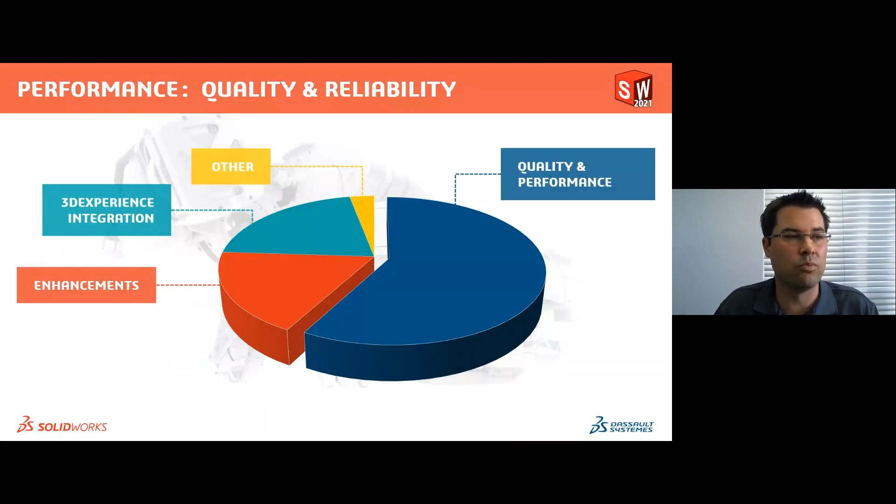And then a further chunk of the pie is enhancements, and then the integration into the cloud with the 3D Experience platform, and then other applications. But you can see SolidWorks has spent a huge amount of time working on making your SolidWorks work better with workflows, bug fixes, and be a lot faster.

So this is looking at the quality and the reliability of SolidWorks over the last 5 years. And the next slide I'm going to show you is going to talk about the severity of these SPRs, these software performance reports, these bug fixes or workflow fixes - things that maybe aren't working right, or software functionality that's not working correctly, or something that just isn't always reliable.

SolidWorks has had a huge increase in closure rates - a 25% increase in the closure rate. Closure rate of what? This is a really good slide to explain what SolidWorks has done with regards to balancing out these bugs or functionality problems into critical versus impact.

The little red circle in the middle is what SolidWorks has been focusing on heavily over the last few years. The problem is that severity 3 and 4, which are on the fringes, are things that are working but just maybe not always reliable, or maybe cause instability. Those things have been growing and growing over the last 5 years, while SolidWorks continues to work on severity 1 and 2.

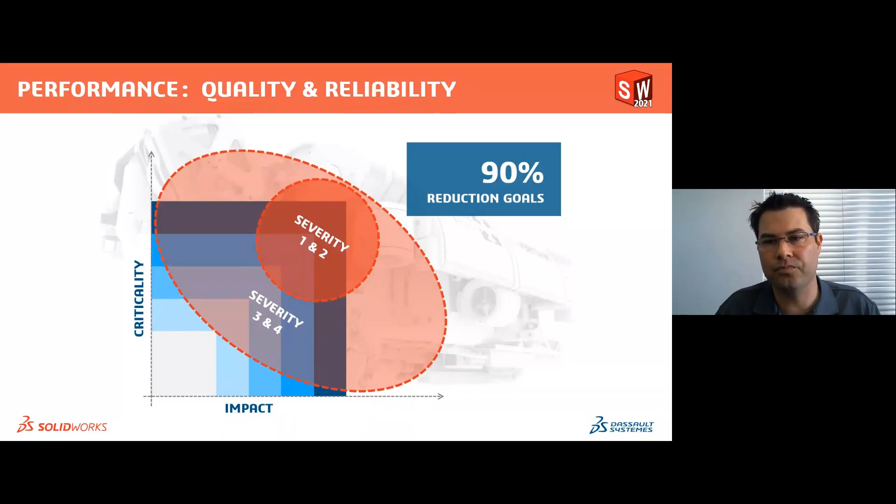SolidWorks has done an incredible amount of work over the last year to reduce this, and they've actually gone more than a 60% reduction of their backlog, hitting severity 1, 2, 3, and 4. They've massively added to the reliability, quality, and performance of SolidWorks by focusing on these 2 key areas. Over the next few years, they aim to reduce all of these bugs right down to 10% of what they're working on. It's a huge commitment from the SolidWorks development team to really make this the most powerful, most stable, most performing software in the world, on top of what it is already right now.

And this is really exciting and really great to see that SolidWorks is listening and they are making this better and faster.

In fact, before I move on - and this is a PDF I can share with you a bit later - there's a 31-page PDF listing all of the SPRs that were fixed in this version of SolidWorks. This is, I think, the 17th or 18th launch I've done personally, and it's the only one I've seen where they actually list the number of service packs or SPRs, bug fixes they've done in the last year in a what's new document. So if you go to your SolidWorks and go to Help, About SolidWorks, they actually list the sheer volume of fixes they've done, which is great.

So let's move straight on to SolidWorks in action.

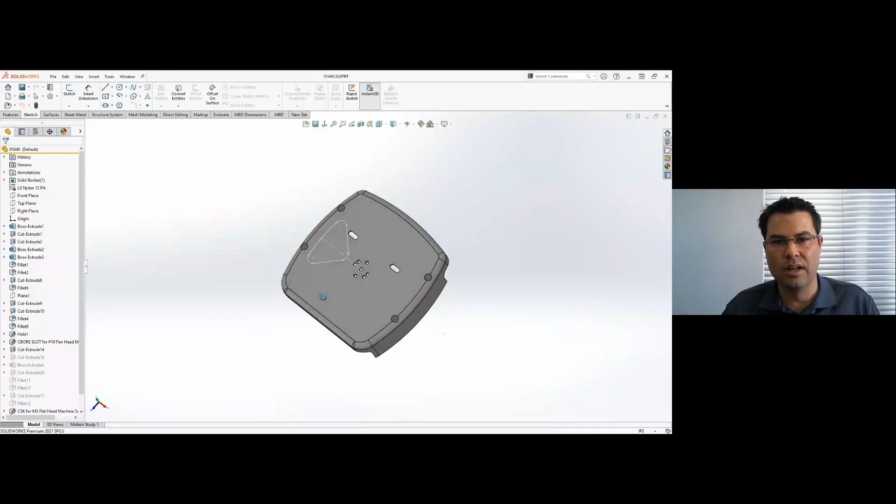Okay, first things first, let's go look at the SOLIDWORKS interface. These are all small things for you users of SOLIDWORKS who've been using it for a while, things that could work a bit easier or give you an easier way to adjust or change things. One thing that annoys me is these gray sketches - it's always difficult to see how they fit in with a model, especially with different color backgrounds. So what you can do is go to settings - SOLIDWORKS has redesigned the look of the color options.

You'll notice the color settings have changed, and your highlighting schemes too - I'll get to selected items now, but let's go to the sketch first. If you go down to sketch and look at an inactive sketch, you'll notice that gray color. If I double click on that palette and make it a funky Lumo green color, and go back to my model - inactive sketch, there we go - now I can see that a lot easier.

What's really interesting is that when you select seeds in a pattern, it's always difficult to understand where's the seed when doing a linear pattern - which is which, and you don't know which one to edit. If you look at these selected items, you don't know what it is. So if you choose maybe blue highlighting as a scheme, selected item number 1 is going to be the root or seed, and the rest will be the pattern or children of that pattern. You can actually change even those colors. SOLIDWORKS really brightens up in 2021, and you can manipulate those as you want, making it a lot more pleasant to work in the environment.

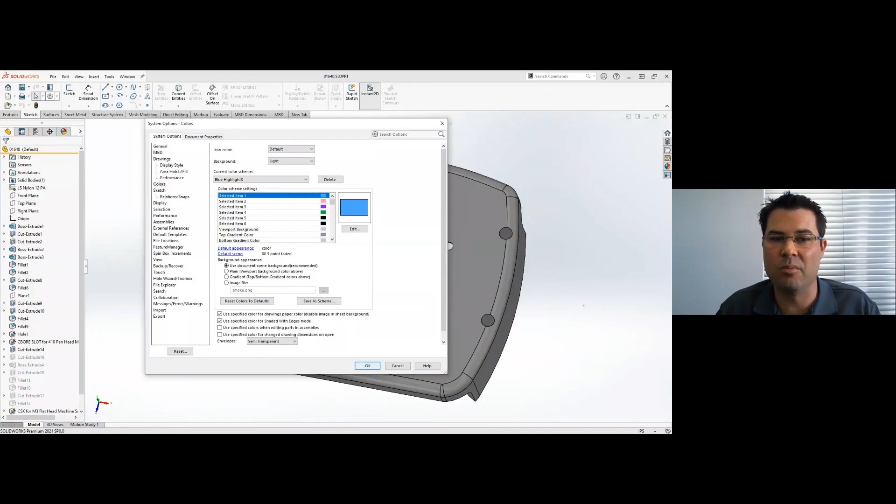And I'll show you some of these examples as I work now.

Robert Miller from iBow is going to be talking tomorrow - he just bragged about this massive screen he's got, this huge 4K, 46-inch screen on his desk.

This 4K has always been supported over the last 3 years, but it's been difficult to understand how to manipulate this command manager. I want to show you a few tricks on your working environment now.

If you look at the top right-hand corner here, you've got a little up arrow which allows you to have a collapsible command manager. If you click on this little button over here, it collapses this side, and if you push F9, it brings it back, giving you a lot more real estate to work in. If you click on one of the command manager icons, it drops back down again. But if you actually drag this body, this line, under mesh modeling or wherever, you can dock this anywhere you like, and you can collapse this as well. This is a really neat way of working in the command manager.

If you want to work like that, that's absolutely possible, and you can dock this on another screen. It's really handy for guys working with large models on a large screen. And that's how we dock it back again.

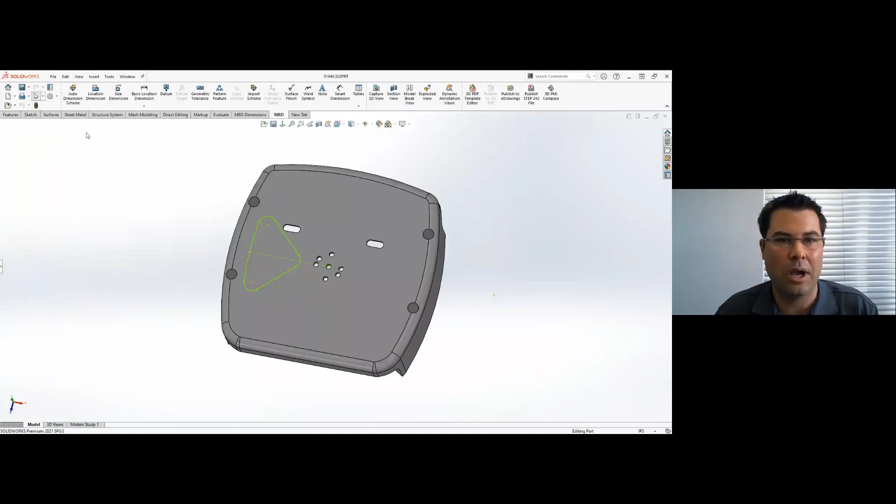Something that's been really great is working with the heads-up user interface. We've got this S key over here, and if you right-click, you've always been able to customize this. But it's been a pain to always go find things by scrolling through all these lines. New is the ability to actually have a search bar.

Now, this is small, but man, it makes life a lot easier. So if we go and say pattern, and we go look at features, there's circular pattern, and I can just drag that onto my shortcut key. And then it will pop up in my S key.

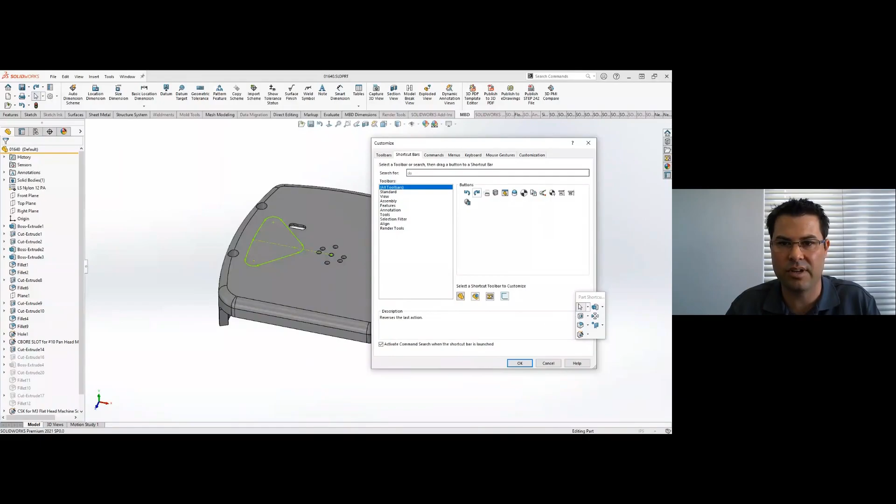Or if I want to manipulate this heads-up interface over here, and I say maybe undo or redo, there's my undo and redo. So I can just drag it over here, and you can see I've actually set open and save there as well. I love this heads-up interface here. It really is handy. I don't have to go and travel all the way there. I can just save my models and open up files by just moving my mouse over there.

Now take note of this undo and redo. I'm going to show you a really cool trick later on about what SOLIDWORKS has done with the redo button. It's super, just have a look here.

So if you click on the sketch, and I use the S key for my pop-up, now I want you to take note of the workflow. I'm going to say extrude cut. It's going to apply the extrude cut. I right click on my screen and I say through all in both directions, and then I do a right click to execute it. I'm still staying in the center of my screen. Notice that. So I want to do a circular pattern now of this feature.

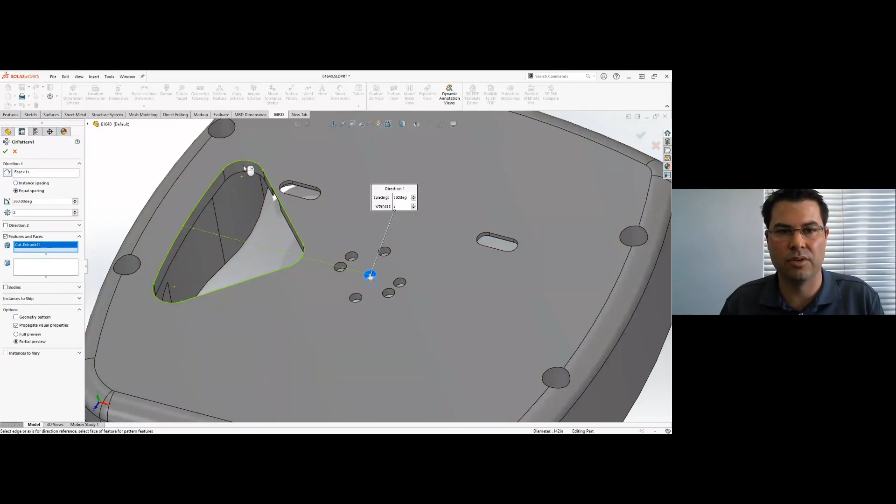So what you do is you do your S key, you use that newly created little circular pattern tool which I've just created. And then you work on the top for your direction one. You can just click a circular face or an edge. The feature is going to be the circular cut that I've just done, and I want to maybe do 3 or 4 of these.

And remember, I showed you that color option earlier on. Look at that. So again, it's easy to change those colors. If you don't like the pinks and the blues, you know where to go and change that now. But have a look at this.

So if I look at this undo button over there, and I go back. Now, we've had the ability in SOLIDWORKS probably for 2 or 3 years now to go right back into the beginning where I started this thing. But if you are clicking crazy and you just click and click and click undo, you have to recreate stuff because you can't redo as much. Now we've got unlimited undo and unlimited redo.

So you've got the other way. You can keep on going now and redo your way all the way back to where you started. So, yay for that. It's really, really handy having both directions. If you make a mistake, click a button. It's on your heads-up interface. Move backwards and forwards as you want. So that is the fun in the user interface environment.

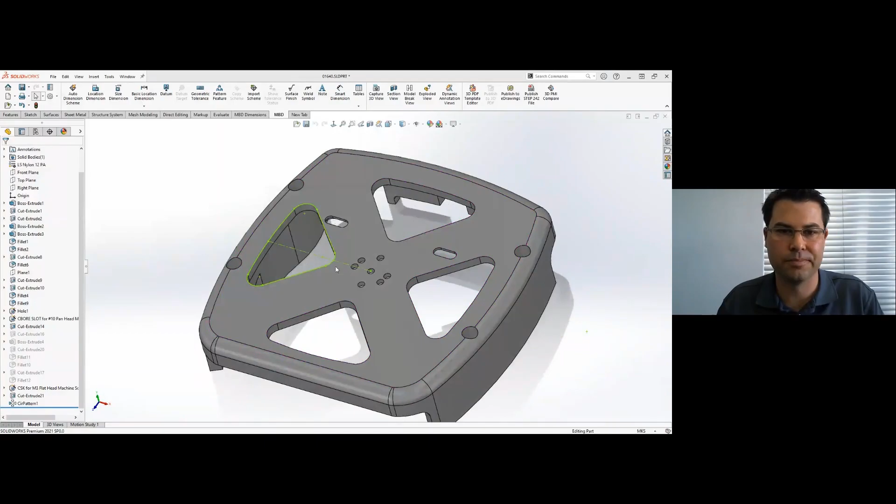So now I'm going to move on to a sheet metal component.

So looking at sheet metal in SOLIDWORKS 2021, we've always had the ability to do an edge flange on a curved edge like this. But the problem is always this non-planar face here. This was easy to do, but what about these edges over here? It's always been a problem. It won't allow us to do anything, and that is incredibly frustrating.

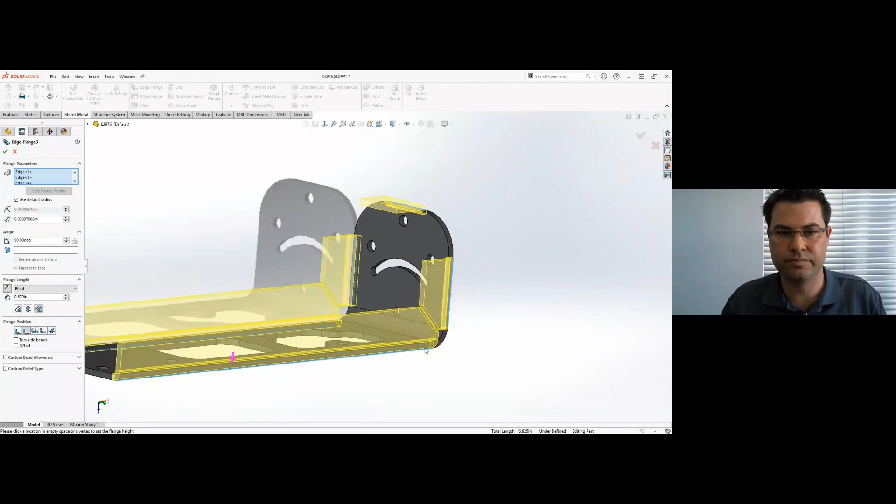So what we can do now with SOLIDWORKS 2021 is select the tangency, select the loop. Let's select the loop. Why is this not selecting the loop for me? There we go.

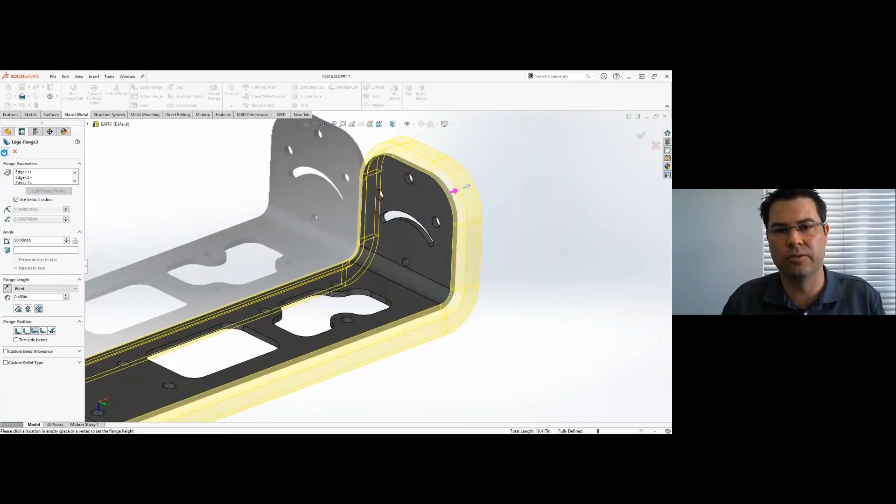So now in 2021, you've got that ability to have a very complex formed part. And you can also adjust the extent of how you would change a normal flange, your flange position still there, your distances, your angles, all of that stuff is available for you to manipulate and change as you would. And what's great about it is it's fully flattenable. So although this is a complex part, I'm able to stamp out this formed part. Really, really powerful new feature in SOLIDWORKS.

Now, when we talk about performance, if you've got a really complex sheet metal part with lots of bends in it, they've also adjusted the algorithm or improved the speed of the algorithm in the new SOLIDWORKS sheet metal unfolding function. So if you're working in sheet metal with complex parts, you are going to see a performance improvement when working with flattening and unflattening parts. It's really, really visible to see.

So here is something a little bit more complicated. I've got a flange, again, on this non-planar curvy face over here. And I just want to edit this part to show you how we can manipulate it in context of an assembly.

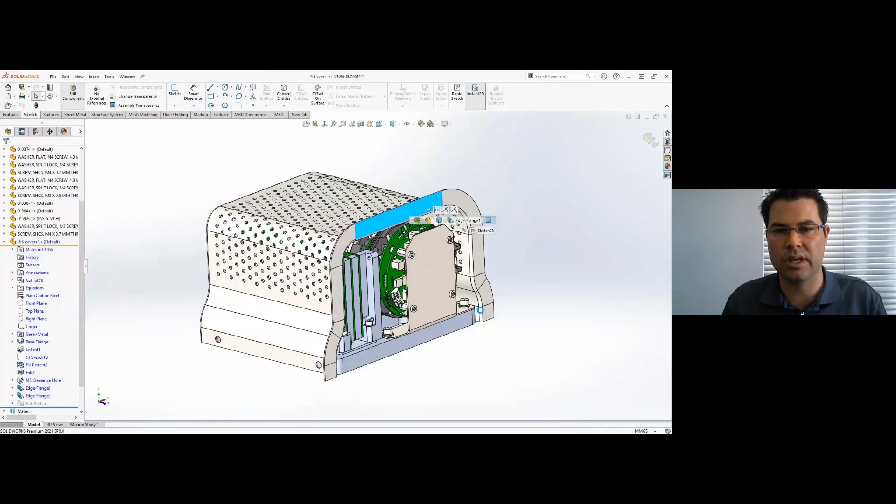So I'm just going to manipulate this edge flange, and edit the feature. Again, all heads-up interface, so I just use that heads-up display to manipulate that edge. What I'm going to do is flip the direction, and then change the angle to 45 degrees. You can get an idea of how that is going to fit in context of the assembly.

Really nice functionality to work with enclosures now, and again, flattening pretty easily. The manufacturing technology has improved drastically. We want to go back and give you the functionality required in order to take use of this manufacturing technology. Really nice to see that we've got this ability now in SOLIDWORKS.

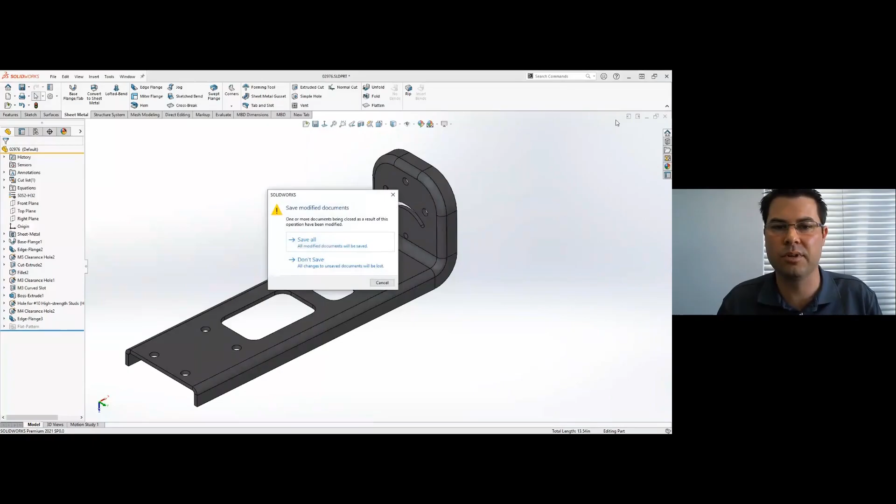All right, so again, I'm not going to cover all of the new features today, otherwise we're going to be here for a while. I just want to cover all of the major highlights in SOLIDWORKS. Now, something that is happening quite often, using my heads-up here, I want to talk to you about 3D printing.

3D printing is becoming very common in our industry. So the 3D Manufacturing Format is something we've had, and we've extended the functionality of this 3MF file format. We now support saving out in 3MF format with textures, occlusions, with opacities. If your file has got transparency on it, it will save it with the transparency.

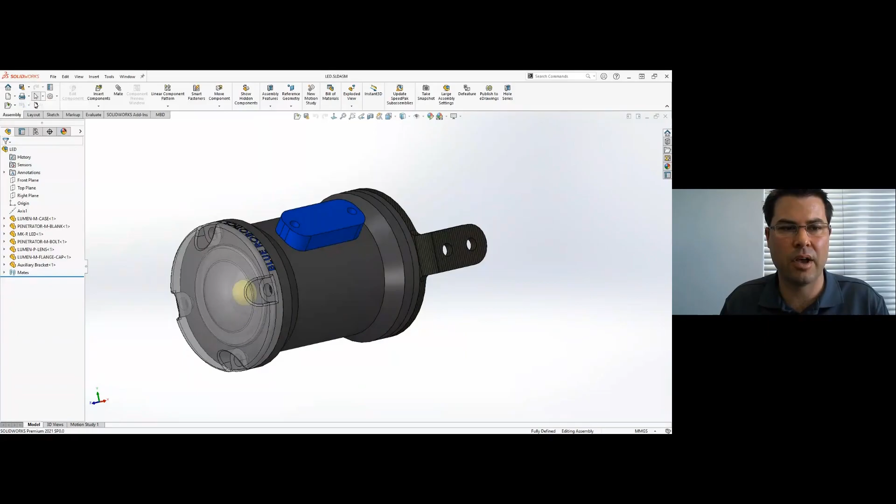So if you go here to File Save As, and save this file as a 3MF file, just go into the options, and you will see under the options dialog there to include the material and appearances. This is something that has been requested by a lot of the guys in the 3D printing industry, so that's really nice to see.

What I'm going to do now is open a 3MF file to show you what it looks like. If I go here to 3MF, I've downloaded a dinosaur yesterday, a T-Rex, and I just wanted to show you the colors. It's amazing. This is a very complex graphics 3MF file, and I just wanted to show you how well SOLIDWORKS brings in and can export all of these crazy colors and textures on this file.

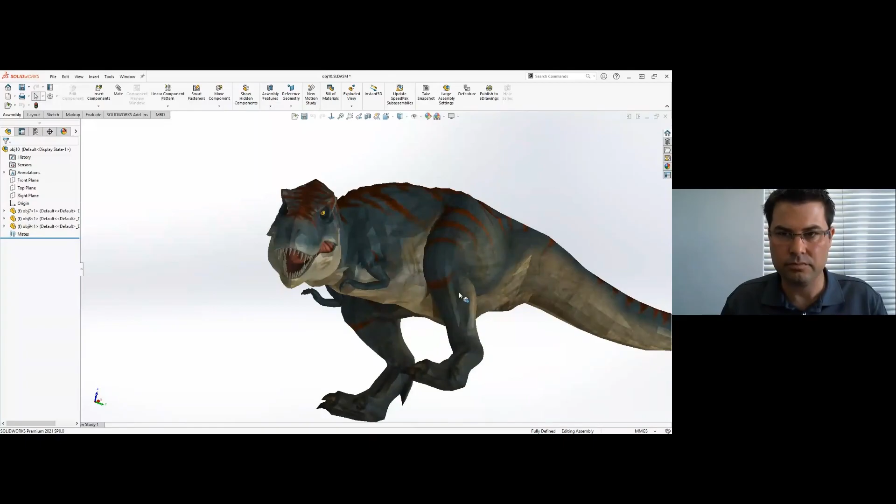So really extended functionality into the 3D printing realm, really handy tools to have in SOLIDWORKS now. No need to have third-party software alongside your SOLIDWORKS.

So for the last few releases, we've spoken about the structure system, and by the way, there are enhancements in the structure system in 2021, you can go and look at it. It's a nice view manipulator - now you can have a little graphic to manipulate the weldment profiles or the profiles. You can go look at that.

But I wanted to go back to weldments and have a look in more detail at what SOLIDWORKS has done to the core weldment functionality of the software. A lot of feedback was given to SOLIDWORKS saying, hey, don't forget about weldments, we love this tool, we want you to enhance it. There are really interesting things I want to show you in weldments.

So the first thing I want to do is zoom in over here and have a look at these two different profiles. It's a 2x3 profile - one is a rectangular profile, and the other one is a square profile. Now, it becomes a bit of a problem when we're trimming something like this because we've got these options to do these butt joints.

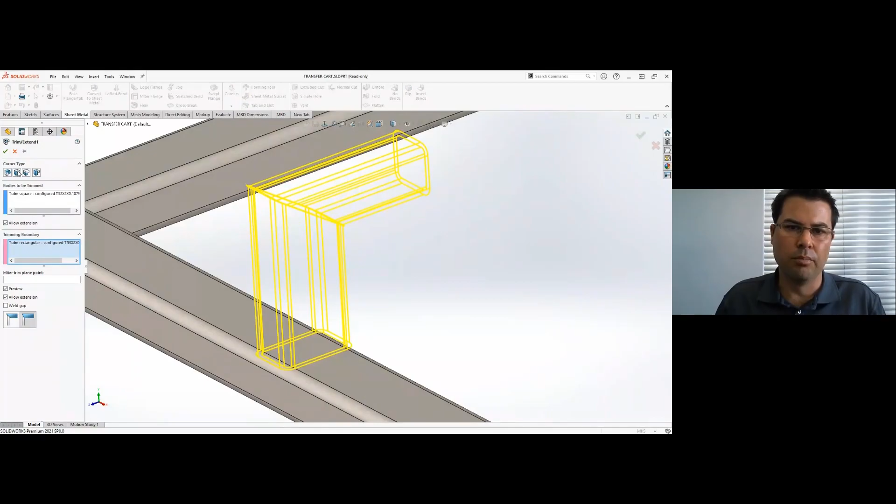But when we're doing the 45-degree miter of this, we end up having this strange scenario where you've got this massive joint because it's a 45-degree angle. It doesn't really help us too much.

So what we've included is a new option in the Trim/Extend where we're able to match the faces. If I say okay now, you will notice that even though they are different shapes, the faces are matched in one click. You don't have to do SolidWorks ninja moves to get it to match up. In the miter function, it's an unequal angle, but it's going to match those faces up beautifully. A really quick little tip that you can take with you and use.

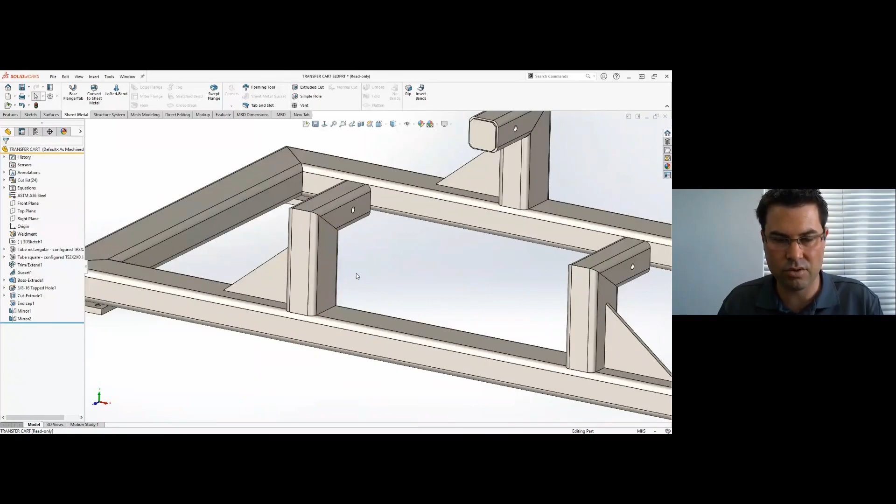Right, so the next thing I'm going to do is look at colors. What I am going to do for a second, just give me a second, I just want to switch over. I realize I need to share my screen - I'm sharing my application at the moment, so if you want to just bear with me for a minute, I'm going to stop the sharing, and load something quickly.

Square Robot has a website, and I need a specific color. I'm going to just share my screen quickly. Screen 1, share. Okay.

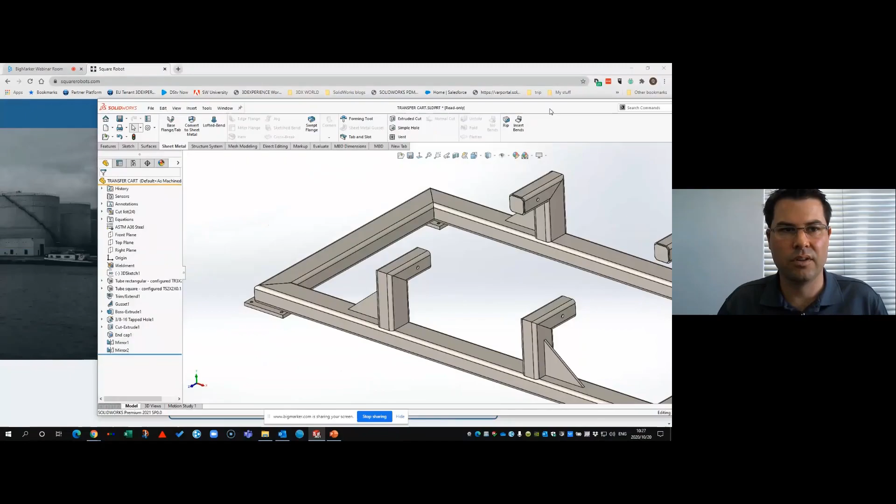So I'm going to try and do this as best I can, so forgive me. This is the Square Robot website, and I would like to match the color of my weldment to the website. How the heck do you do that?

This is a really cool new feature in SolidWorks 2021 where we've got a button over there, edit appearance, which has always been there. But what's new is this color picker over here. So now what I can do is click and drag and move that color picker over to the blue, and it will actually map the color of the website to the color of the part. You don't have to try and get your RGB colors as right as possible. This is a really handy tool.

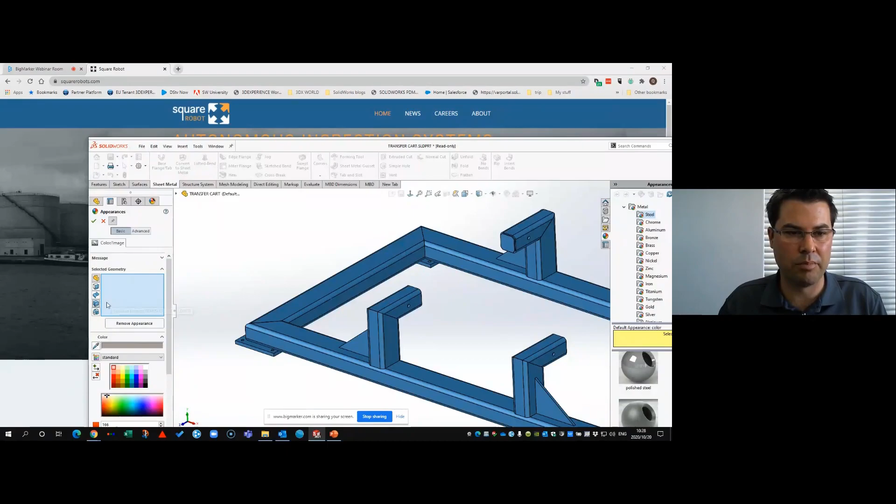So once I say okay, it applies the material to there, and I can then also go and apply materials to the body. Let's go and have a look at the body I want to make of this vertical part over here. I want to maybe make these guys an orange color, so I'm going to drag over to the orange of that little triangle there, and there it makes it orange.

So now if I go and maximize my SolidWorks again and do a little rebuild, all of my colors will be repeated in my pattern. So I like that a lot. It saves me a lot of energy and effort. I think that's a really, really handy little tool.

So now that I got my colors waxed and I understand everything, I want to move over to the properties of my part. By the way, I don't know if you've noticed, I've actually taken my properties and I've thrown them into this little box over here in my tab. No matter which tab I actually move in between, it's still there. Let me tell you how I did that.

So if you go to Customize now, not only can you lock that command manager, as I said previously, having another screen, you're also able to show that little quick access toolbar. Remember it was on top there? If you click at the bottom, it can move it into the side panel over there.

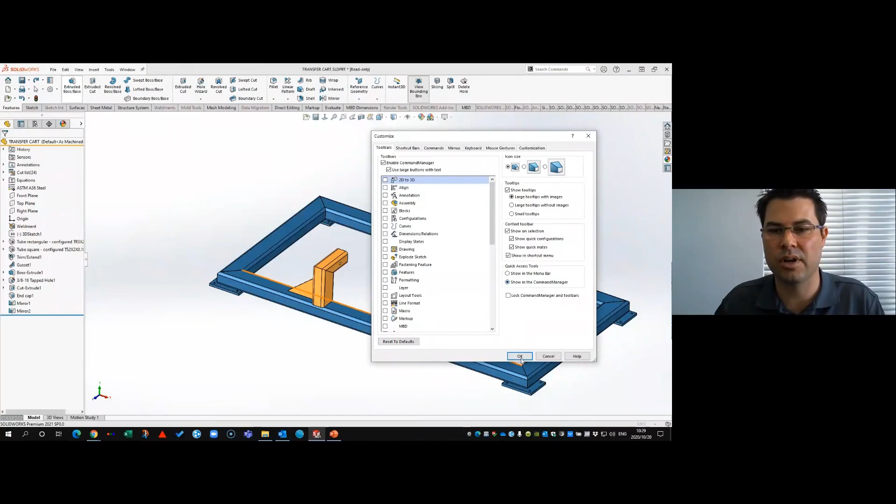Okay, so moving swiftly along, let's go and have a look at the properties of my weldment. Good news, 2021 SolidWorks now supports equations in properties. Have a look at this. I want to look at this part and understand maybe a cost estimate. Now in my type column, I've got equation as an option, and what I'm going to do is look at the 3 options that are there.

This was previously only available in the equations environment. Now it's in properties. I've already created global variables where I've got the different sizes at Rand per meter. It's 400 Rand a meter and 330 Rand a meter, and I've also got 42 Rand a kilogram. I just made up some numbers.

So what I'm going to do is take this Rand per kilogram and multiply that by the mass of the part. So there we go, it's automatically calculated the two in an equation, and it's calculated for me. I don't know if I did that properly - I don't think I did.

Sorry, Rand. Let me make sure my num lock's on here. Multiplied by the mass - that is correct. So it's going to be 1,900 Rand, super cheap part, calculated very easily from the weight and the global variable.

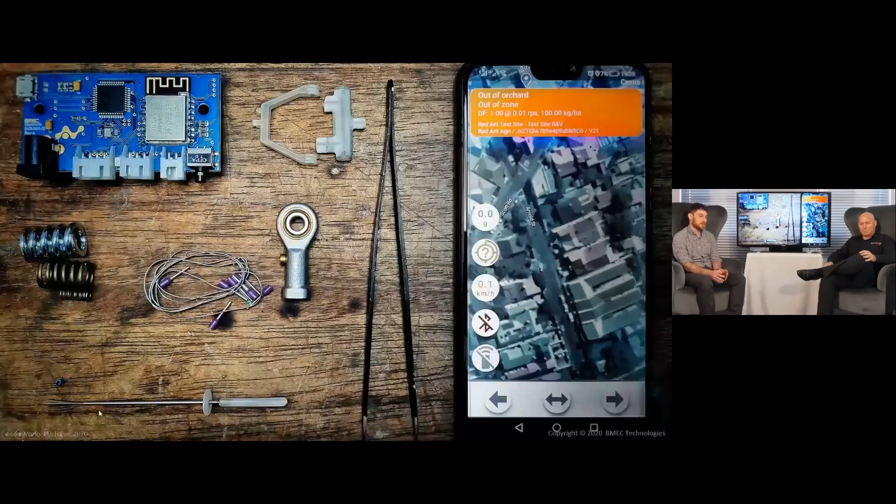Like I said, we pride ourselves on taking on any projects that come through the door, and as a result we have a very broad base of expertise, and we really specialize in putting all of those things together, although we do projects with individual components too. This picture encapsulates a lot of the different things we do—you can see there's a circuit board or PCB, and we do electronic and PCB development. You can see there's a couple of mechanical components, so we do design and manufacture of mechanical components, everything from bigger agricultural equipment all the way down to microscopic surgical instruments and implants. I see there's a cell phone in the shot as well.

So on top of that, we also do mobile application development and web application development, as well as the full stack of back-end servers and all that kind of stuff. So you do start-to-end full solutions for the customer. We love pulling all those pieces together when there's a circuit board and a mechanical element and a cell phone app, and they all talk together, and there's dashboards. We love those kind of projects.

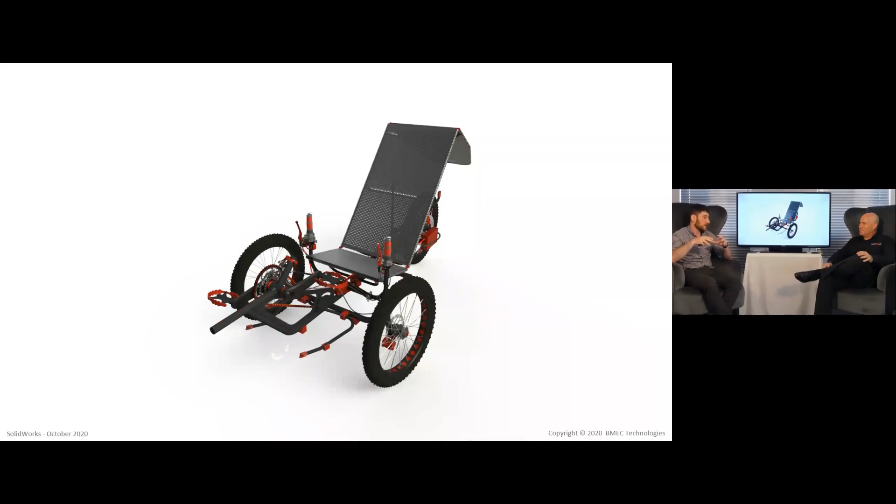And I think just from the perspective of the time it takes to do the CAD, we're not slow at CAD. We don't take forever to do a model. It is built into our procedure. We do it from the beginning. And as you say, it's just a mindset to say, I'm drawing this part and all the details are going to be in it from the beginning, and it works out.

Now, you said something there that we spoke about, your procedure. You've established a very specific way of drawing that you enforce through everybody in the company. And you said that actually makes it possible for anybody to work on one another's files. So let's move on into how you employ SOLIDWORKS.

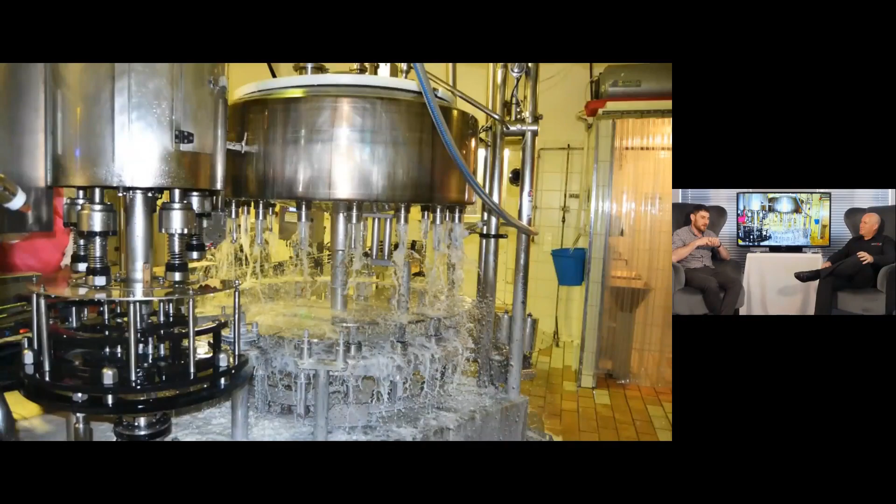Okay, so I've kind of already mentioned this, but a long time ago, I worked with a very talented engineer and a great draftsperson. But he had an issue, and his issue was that every time we made something of his, we tended to have to do a little bit of rework on the final product. And by rework, I mean an angle grinder and a welder at 2:00 in the morning in a puddle of spilt milk. So yeah, things can get pretty bad. Never underestimate the consequences of a blue circle in your sketch.

Okay, so you're referring to a guy that did brilliant design, but he didn't fully define his sketches. He left things open and so on. Yeah, so I think that kind of

brings us to this topic of discussion, and that's that for me, it's a simple feature, but one of the most powerful things about SolidWorks is being able to tell that your sketches are fully defined and things aren't floating around, because that's exactly how those mistakes would happen - undefined features in the model. Basically when you build that into an assembly and then you start editing parts in assembly, which is an extremely powerful tool, you are prone to accidentally making unintended links between things or shifting something unintentionally, and it's really important that you don't have that.

You actually use a big base sketch with a lot of information in it. Yeah, so that's one of our key features of our drawing standard, and you mentioned this earlier, and you guys saw the end effect of it with the surgical instruments - it's critical for us that within our organization, and when our clients take on our drawing packs that we produce for them, they're able to open up a model and understand it. We can't afford internally or externally for someone to have to spend 2 or 3 hours getting to grips with each part in a big assembly.

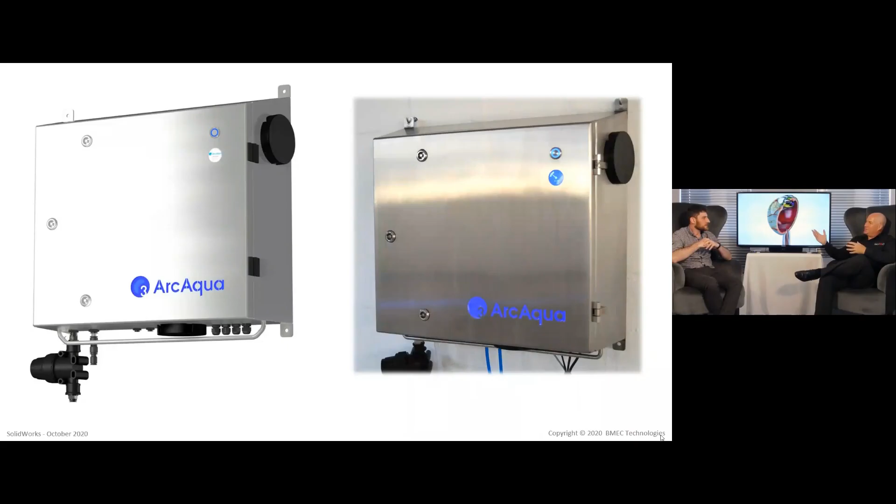So that's brilliant. This is PhotoView. You're just bragging a bit here. You mentioned this is still PhotoView, not even Visualize, and this was done before Visualize. So no, excellent.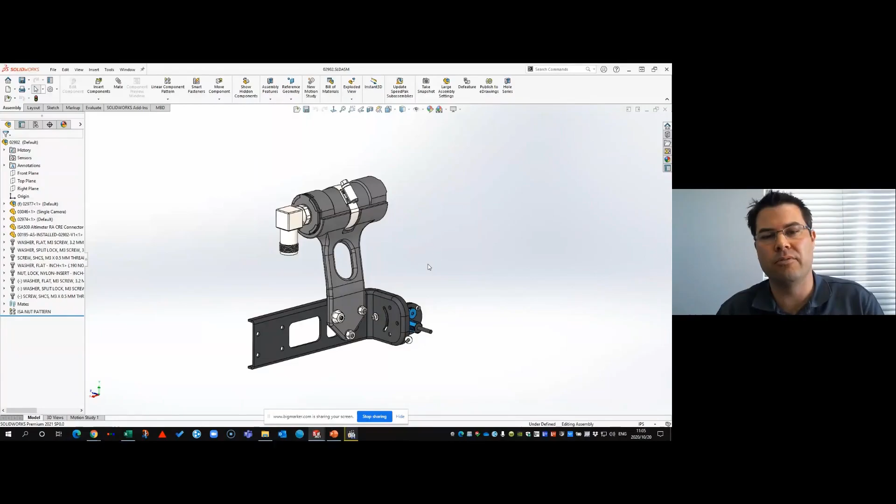Now, if I control-select these two faces and go to the mate tool, you'll notice on the left-hand side that the mate environment has been updated. These tabs have now been included. Previously you'd have to scroll and scroll through a long list of things you could do, but they've added so many tools to mating that they've now got little tabs, which is so much easier to manage between the different environments.

So one thing you would have noticed is that this screw is on the wrong side, so that's a bit of a problem. Let me show you how we fix this, it's a common problem. That washer, you should know this as well, but in your feature tree there's actually a mates folder which you can access from the tree. So if I go there, I can flip the mate alignment just like that, and it moves it completely around. But sometimes, and don't worry about this, it's just a read-only file.

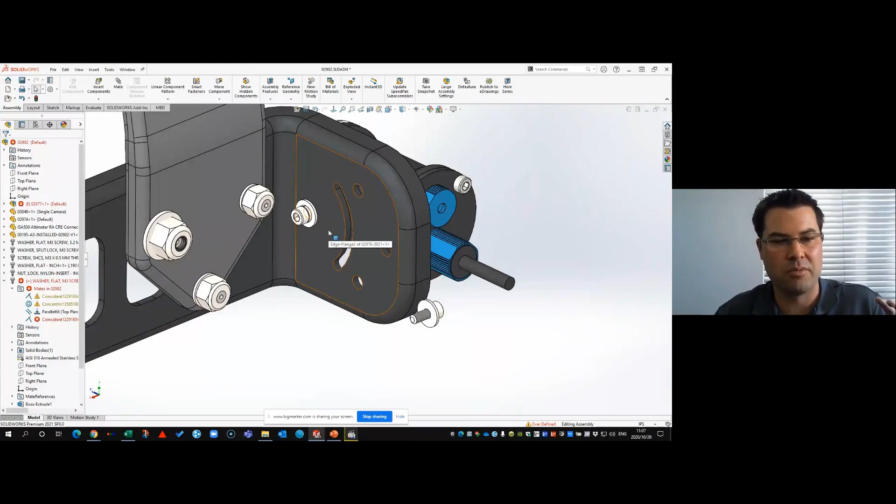Sometimes when you do that, you get a message on your screen that says 'this change will cause mating errors, do you want it to continue?' I want to see in the chat, those of you who have had this message and said no. When you say no, all hell breaks loose and your feature tree goes crazy, and you realize yes was the right answer. Yes is always the right answer, but sometimes you want to intentionally break it. 99% of the time you want to say yes, because it's going to flip the alignment of all the other mates involved, giving you a much safer environment.

So how do you make it always yes? Well, there's an easy answer to that. You go to the Tools, Options, and there's actually a setting for that now, and I'm going to show you. When you've got mate alignment, always just say yes. That's a little setting that will make your life that much easier. So go have a look at that tool - look how it flips all of the mate alignments. So much easier if you've got that down, just a little trick for you.

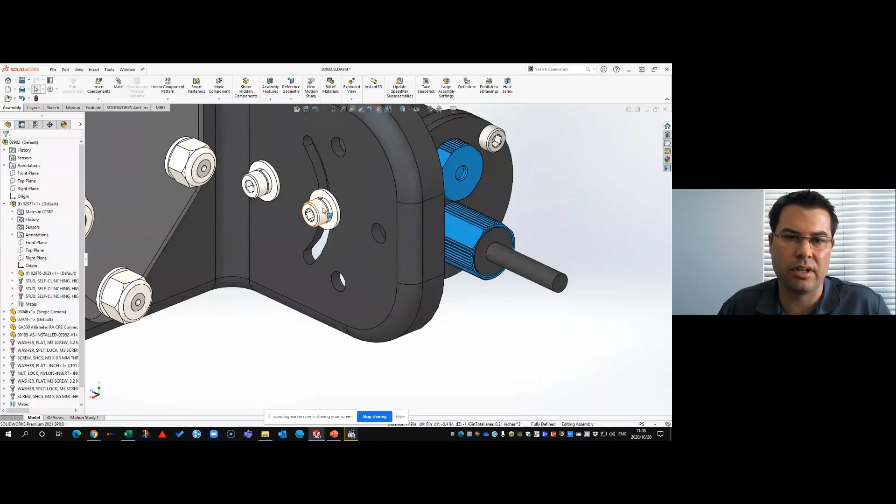I'm going to throw you some little tips and tricks here in between the event. Another really cool tip is that if you are working with a slot and a circular face in the pop-up, you've got the slot tool. By default in SOLIDWORKS, you can actually set what type of slot you'd like. I've put that in the center, and I've locked the rotation for those engineers that are OCD and don't want that thing to rotate. Just a click, a right click, and we are done. So that slot is now locked in place as well. And ironically, there's a setting for that too.

So you've got options in SOLIDWORKS to have in mates under your document properties, and you can actually have things like misalign mates, your default constraints for your slots. You can even do that as a document property, so you can always have it like you want it.

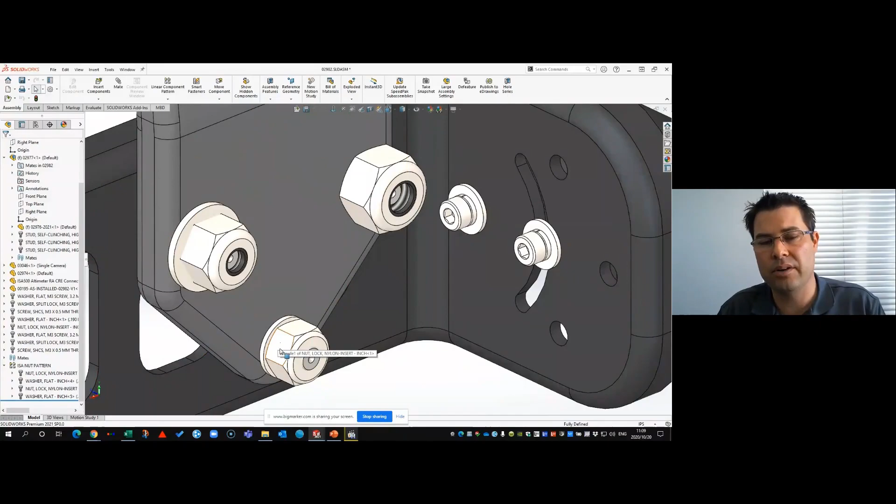Something else I'm going to do is look at this left-hand side, and you'll notice I've got this pattern over here, and remember those color selections I showed you earlier show you the seed component at the bottom. Now, what SOLIDWORKS allows me to do in the past is adjust the size of each individual instance of that pattern. So although the seed or root of that pattern remains the same, the rest I can change, which is sometimes a massive problem. So what we've allowed SOLIDWORKS to do in 2021 is actually lock that - we synchronize all of those components to the seed. So no matter what you do now, it will always be consistent. You can either have flexibility over the configurations of the pattern, or you can drive that through the seed in the pattern. So it's really nice, and you are not able to change anything anymore. A really nice little trick there for you as well.

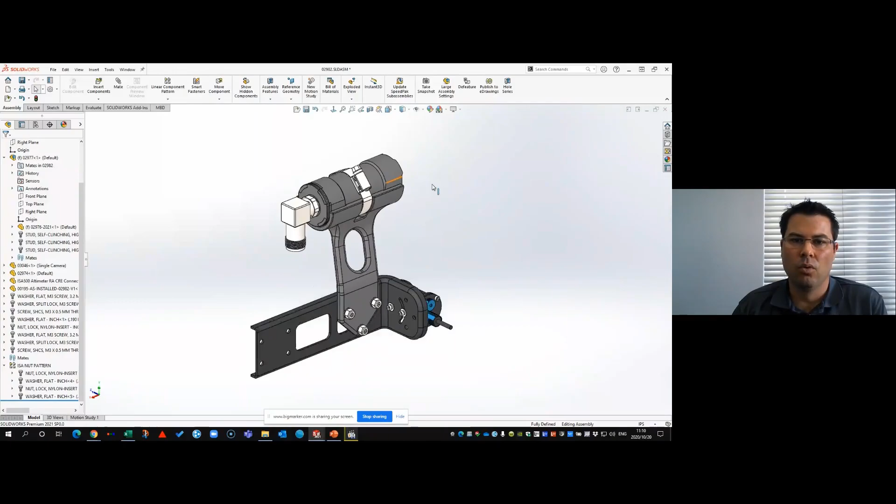Something that has always been a problem is the communication of interferences. When I've got an interference check on a small subassembly like this, it's quite easy, but how do I communicate it? So we go to interference detection, have a look at the interference detection tool, and calculate it - nothing here is new. But for those of you who don't know, there's a little fasteners folder here for all of my fasteners, and I'm actually going to choose to ignore those, because I understand there will be some tight fits with my fasteners. I'm going to ignore those - I don't want to report on that. So what this allows me to do now is have a save results button.

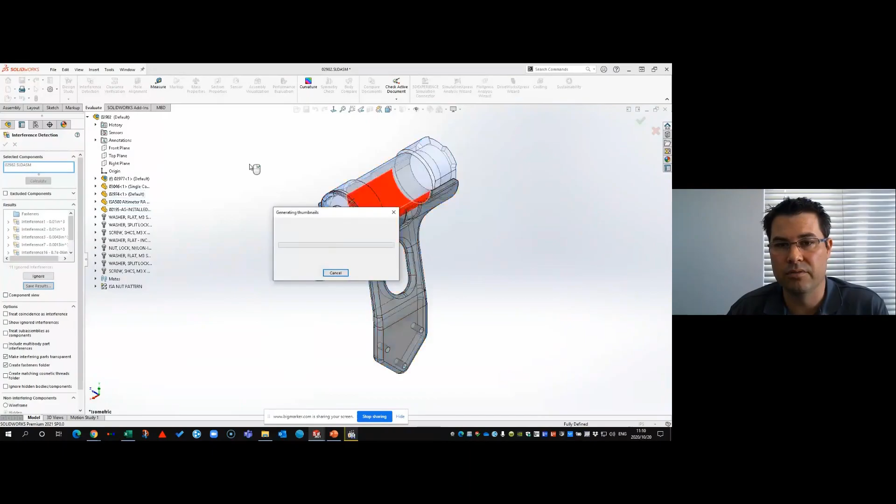If I say save results, I'm able to take this and save it out, and there's a thumbnails option there. So if I save this out, SOLIDWORKS is going to take a snapshot of each of those errors or interferences that I've got in my model. It's going to put it on a really nice Excel spreadsheet for me - just right click there to save. If I open up the Excel spreadsheet, it looks like this: it shows you the different interferences, the image of where it's interfering, how much volume of interference there is, the components that are interfering, and a full reference of where you can find that. So if you're going to share this or have a meeting review, you can have a complete, comprehensive idea of what's going on, and you've got a roadmap to work with. Really, really nice to see that.

Right, so I'm going to shut this down, and I'm going to move on to my sim performance.

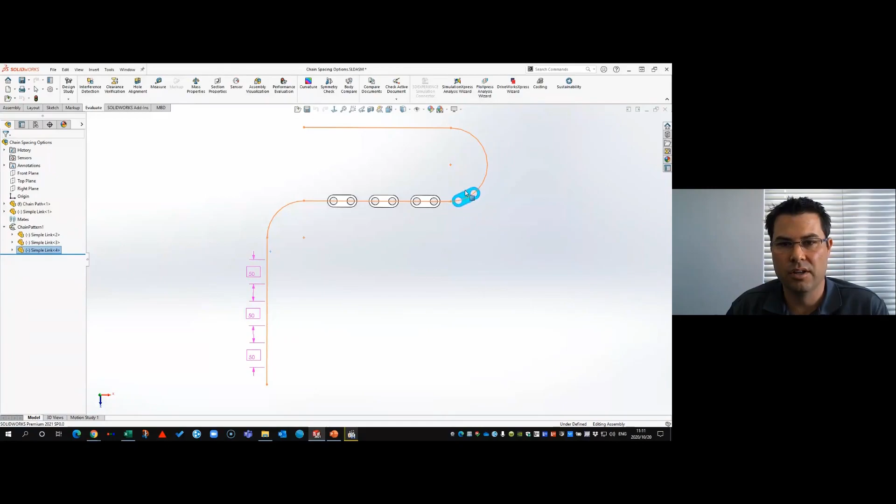Oh yeah, while we're here, this is something nice as well. We spoke about, Raphael was speaking about a chain, and we've always had this little chain pattern in SOLIDWORKS, which is really fun. I think about 5 years ago they brought it in. It's really powerful.

What they've done in the new version is they've added this linear distance or distance along path option for you to choose from. I've just put a dimension between the start and end of each link over here, just to show you the dynamic movement as I measure along the distance of the path. It's interesting to see as I change this and move it along how the dimensions actually change. So if I push this along, you can see it's measuring - it's keeping the distance along the path, not a linear distance.

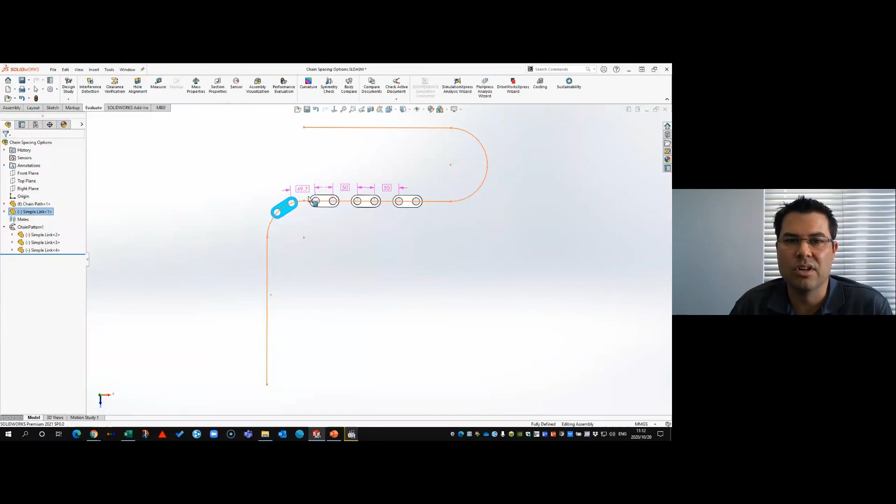And it's really, really powerful to have that flexibility without having to do SOLIDWORKS ninja moves in order to get it right. It's a tick box now, and you've got the functionality. So really nice little trick.

Performance - you know, I was bragging about that earlier on, and I'm just going to move my screen over here. Give me 1 second.

I'm going to share something with you, which is the performance difference between SOLIDWORKS 2020 and SOLIDWORKS 2021. Although the functionality for the performance pipeline was in SOLIDWORKS 2020, it's now on by default in all versions of SOLIDWORKS. So you will notice that if you go to Tools and Options and Performance, that's Enhanced Graphics Performance is a button that is on.

What I'm going to do is I'm actually going to go to the software, big marker, and I'm just going to launch a poll. It'll be interesting for me to see - Wesley, don't you want to just go to the poll quickly and launch the poll for me on the performance pipeline, please? I'd like to just see people's response and who's actually tried this.

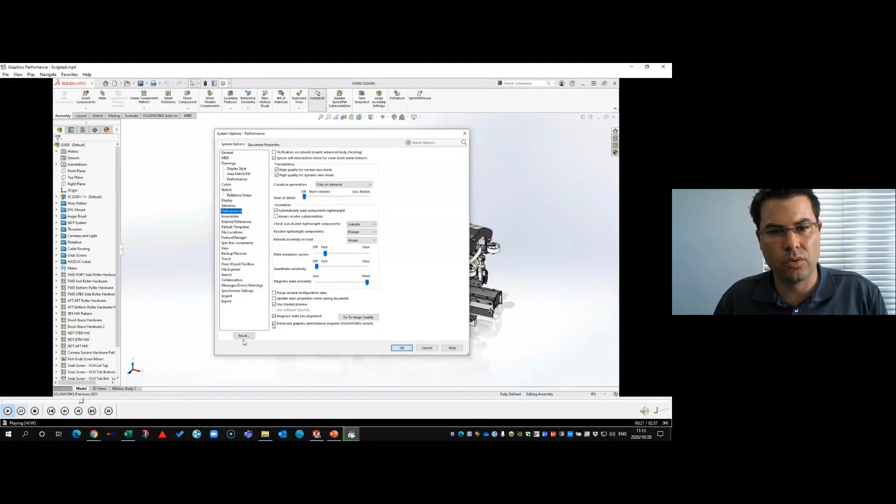So this is a complete rewrite of the code of SOLIDWORKS using OpenGL 4.5. This is 2021, same software, same hardware, with the option on versus the option off. Again, this option is going to be on by default for all of you, but it's taking the workload and shifting it off of the CPU and handing it over to the GPU.

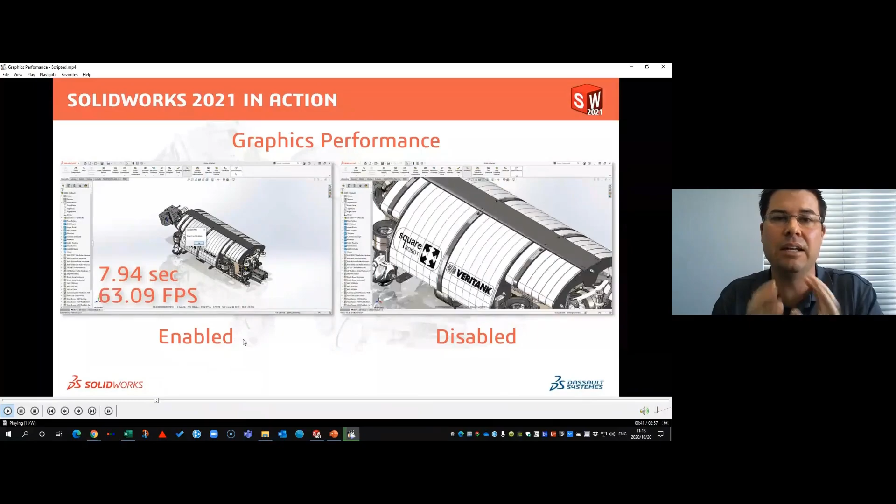So the performance difference is massive. Same hardware, same graphics cards, and you can look at the times. This is a macro that ran - it did 50 mouse moves, moving around, zooming in, zooming out. The one on the left with enable did it in 7.9 seconds, and the other one did 161 seconds with a frame rate of 63, which is incredibly fast.

And really, when you put that on and you work in SOLIDWORKS with even an assembly like this, which is about 2,500 components, it's a huge difference. You can feel it immediately as you're working in this environment.

So I'm encouraging you to really get a new graphics card if you haven't got it in the last 5 years - generally those supporting OpenGL 4.5. So it's all of the graphics cards over the last 4 years. If you've got one of those, you're okay. Just update your drivers, and you're going to take advantage of that.

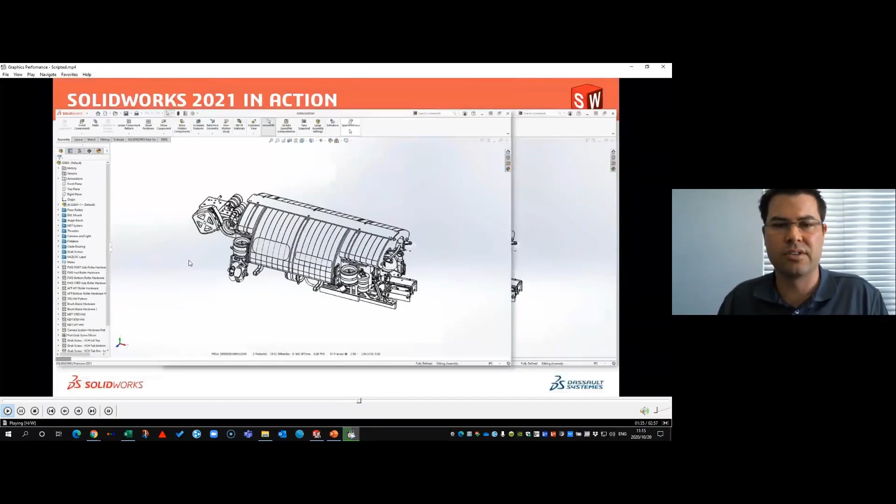So this is hidden lines removed, hidden lines visible. We just changed that so we can see the silhouette edges. You just want to see the massive difference in frame rate working in 2021 with the option set on versus not, and it really handles this complex amount of edges so well. And again, it's just because SolidWorks has shifted that workload off to the GPU, and the GPU is doing most of the work.

Your graphics card is working overtime now, which is fantastic news. And we can see a huge performance jump in SolidWorks, and that is really on graphics, just the usability, the feel of working in the software.

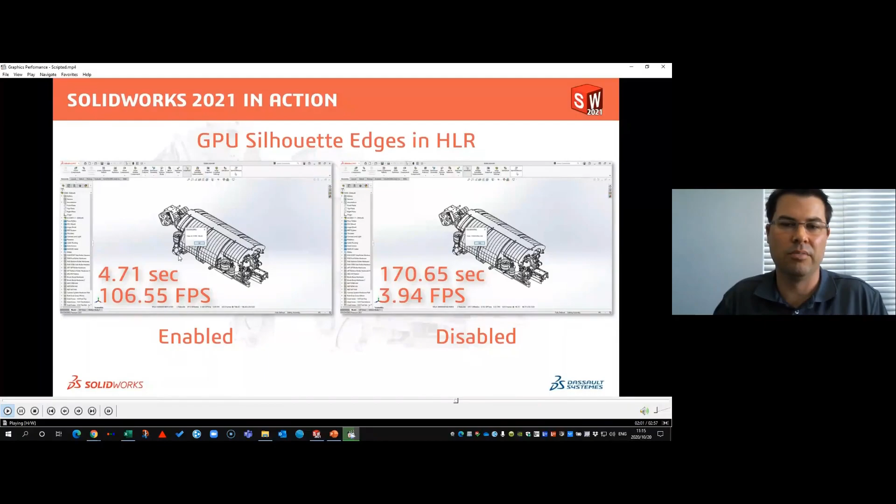It's really clever stuff. They've used a thing called occlusion culling, and as we rotate this model, it's something - that's why I'm playing a video.

This is not available to you, just for us to show you what's happening.

This occlusion culling is a bit of technology where they remove areas of the model that you can't see. It doesn't render it at all, doesn't need to, you can't see it. Previously SolidWorks used to render everything even if you couldn't see it. Now with occlusion culling, it does clever work in the background where it doesn't even render the stuff you can't see. It's irrelevant, and SolidWorks has done a really good job getting that working faster. Really cool, really works. We've opened up tons of large assemblies, and it's really fun to see.

I was at a customer a few months ago, just before lockdown in 2020, or was it 2021 beta, and asked the customer to sit down behind the laptop. I loaded SolidWorks on their machine, turned the option on, and opened up their largest GA. One of the guys sat down and rotated around with no expression on his face, and I said, why do you look so neutral? You're not excited about anything. He said, I honestly can't give you any feedback, I've never been able to open this assembly on my machine before, so this is completely new to me. This is amazing to see on a normal machine, a 5-year-old computer, just taking complete advantage of the new tech.

Really exciting. So if I just go and say file open, I'm going to open up a top level assembly. This is the main top-level robot that I'm going to open up, and I'm going to do this stuff live, not videos, and I'm just going to open it up in lightweight.

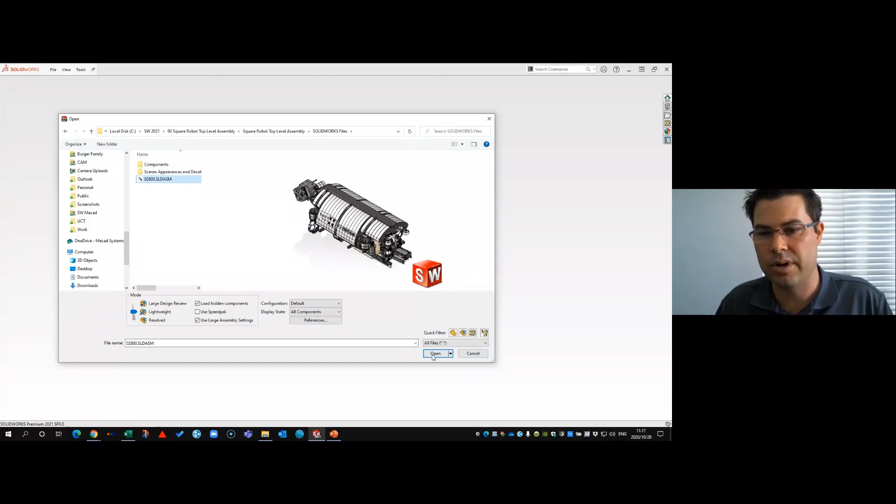So even opening files is faster in SolidWorks 2021. They've actually ported this back into Service Pack 2 of 2020 SolidWorks, the one you have now. And the drawing performance came in Service Pack 5 of SolidWorks 2020 as well. There's backporting on some of these performance improvements in the software.

This is a 2,500 component assembly that I'm opening up in lightweight mode, not large design review mode. I'm opening this assembly in 27 seconds. It's very fast, and you can again see the performance of this live - it's really snappy and really quick. So at 27 seconds I've opened the assembly, it's in lightweight mode, and it's really nice to see.

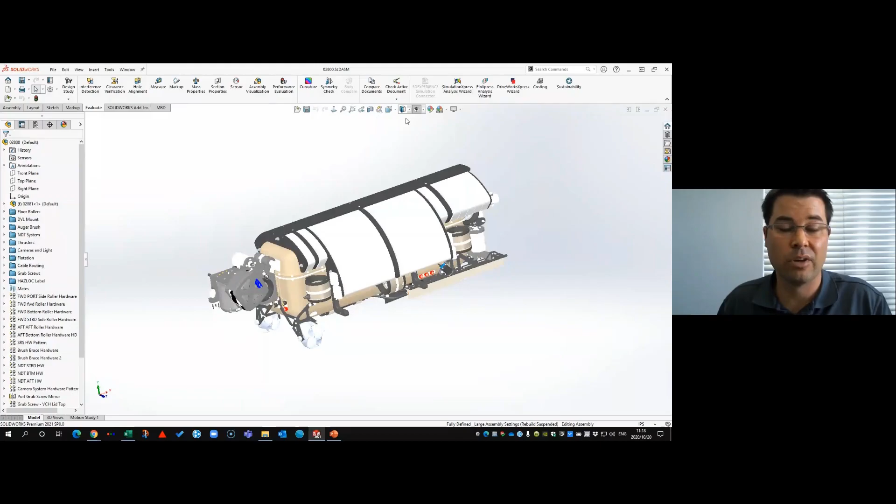So 2021 Service Pack 0 is already available, by the way.

Something else I want to show you which I thought is really clever - what SolidWorks has done is loaded this in lightweight mode, but you'll see some of these are already resolved, and you may be asking why are some of these resolved already. The reason is a bit of new technology, a new feature they've added. If I maximize the part or subassembly, it automatically resolves those - here's all the features now. And if I go to this one, you see there's a feature there. In previous versions of SolidWorks, if you click that, it's normally just a plane, nothing there. Now it intelligently loads what you need. So if I need to edit this washer and maximize that, there's all the features I need to edit, and it leaves everything else unloaded because I don't need it. Very clever piece of coding by the SolidWorks guys - I think that is a very smart idea.

So what I'm going to do is open up this subassembly at the bottom. Now you'll notice the screen's jumping on the left - do you notice that? On the left-hand side it's jumping and taking long to open. This is a small subassembly, there's just a few components over there.

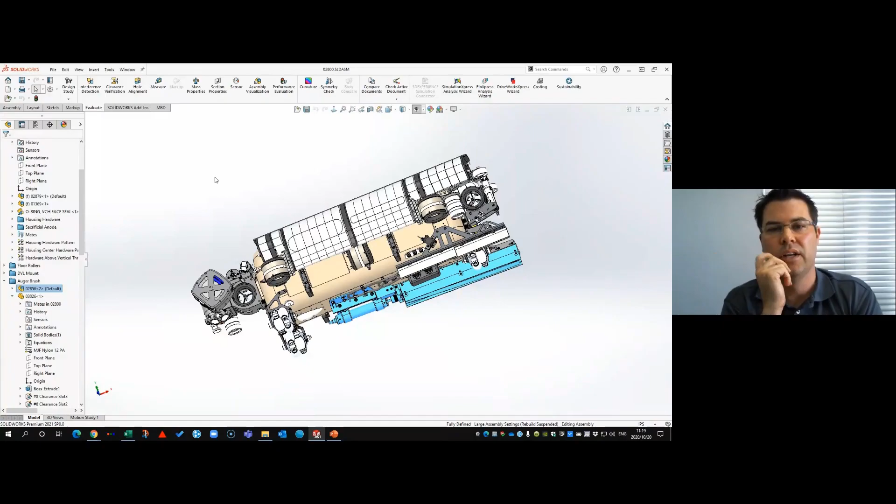Don't worry, this is not a bug in the new version of SolidWorks. This is a common occurrence with our customers - we get this strange looping effect, and then we get called and told your SolidWorks is broken, this new version's terrible, what are you doing, why is it taking so long? Then the tech team goes in, has a look at the files, and we find a thing called a circular reference. But it's always very difficult to understand - where is a circular reference, what is a circular reference? A circular reference, if I can simplify it, is an in-context design part that references each other.

So you use this part to create this part, then you make a hole in the one, and then you use the hole on the new part to define it. It goes in a circle, so it solves itself round and round, and it gets crazy. That's why SolidWorks jumps up and down in the tree. It's confused, trying to solve the one before it solves the other, and it goes in a loop. We call it a circular reference, and it's a massive no-no in any parametric design system. But how do you find that?

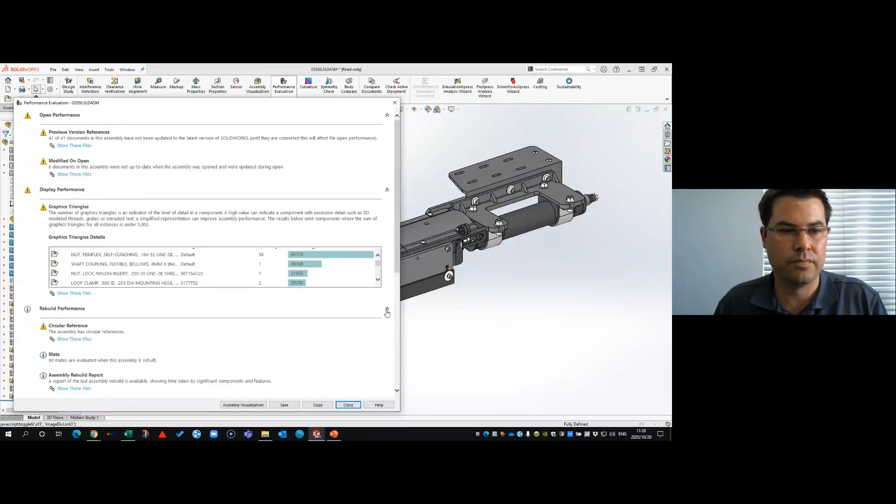In SolidWorks, if you've got dodgy behavior in a part, you go to your performance evaluation. It's going to tell you exactly - I've got previous versions of this file, it was modified then, I might have some graphic issues to look at. I've got statistics over here, performance settings, and I can have a look at the settings to see what's actually going on. It's going to tell me under my rebuild performance, which is what I showed you earlier, that these files have circular references.

Now I've got a nice little pop-up that tells me, sorry Quentin, you've got these two holes, hole 2 and hole 3 in these parts. It's got reference edges even, and it's telling me these are the guys causing the problem. You can actually print it out, copy it, save it and go have a look where it is. But for the convenience of demo, I know exactly where they are - these are the two guilty parts.

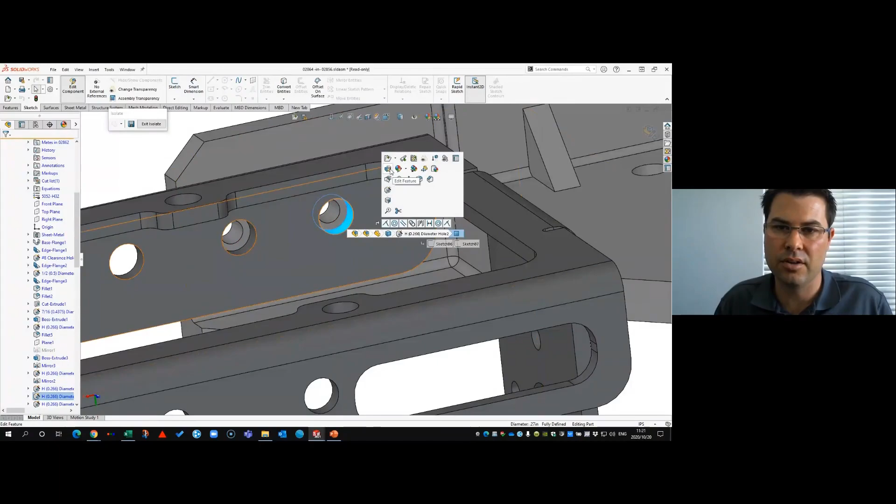And if I go isolate these two guys, we can have a look and see what's going on here. So this is the two parts created in context of the assembly, which is great, but I've got a hole that was created. If I go edit this part, don't worry about the error message, it's just because I'm working with a read-only file. If I click there and say edit the feature, it's using the hole in my hole wizard as normal, but I'm using the position of the other hole to create this hole. Great, nothing wrong with that.

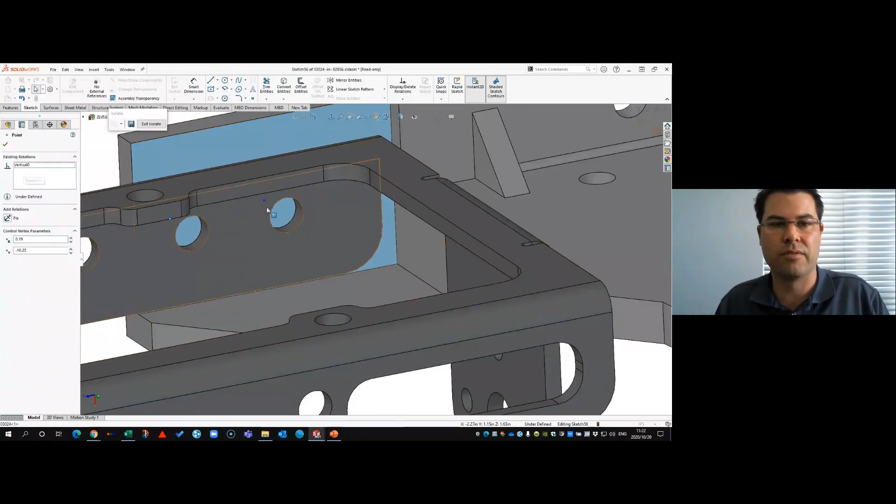The problem comes in when I look at the gray part behind this one. I've then gone and made that hole also in context and referencing this hole. So someone in the design team went and referenced this sketch to the hole. Can you see the idea of having this infinite loop? The one is referencing the other, but the other one was actually created before it, and it becomes an absolute mess. So what you've got to do is delete these circular references, and just use your normal dimensioning tools to place these guys in a position satisfied with normal dimensions. It's so much easier than using crazy dimensions.

Now I want to show you something while I'm here. You notice the dimension color is a more dull color. In the new version of SolidWorks, they've made the dimensions a softer color so you can place the dimensions without having them interfere where you want to place them. It's just a clever little trick they've done. So now that I've placed my model, got all my dimensions fixed up, I've broken that, and the circular references are now gone - so much easier than having interconnected errors with my models going in loops.

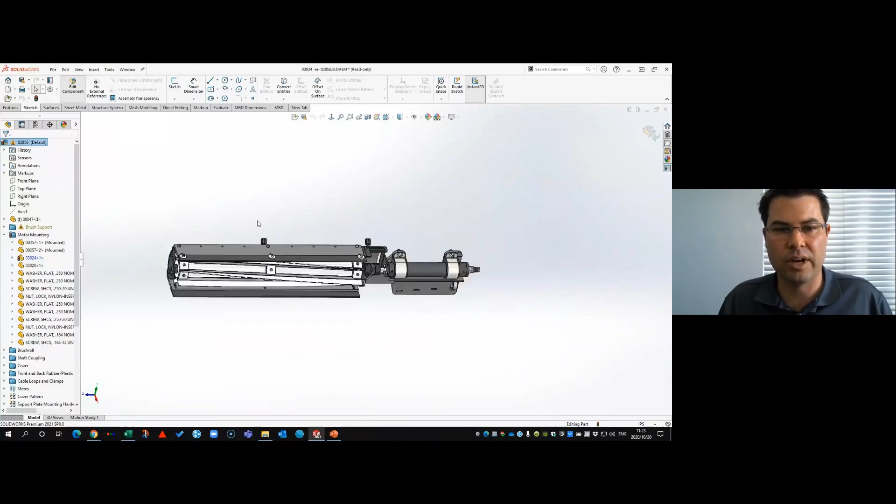Now I want to show you something really interesting. I've got a problem where this part is really massive. In the past, we've had a tool called the de-feature tool. If I go here to this brush roll, it's a complex set of parts, but I don't necessarily want to have all this detail in my part. It's completely unnecessary, it's going to create a lot of work for me downline. I want to de-feature this, and a lot of you have used this de-feature tool. So I did a quick rebuild there now - you see, top level rebuild, everything's happy, it rebuilds quickly, no problems, everything's hunky-dory.

So if I go to my assembly and I see the de-feature tool, you can also go and search for that under de-feature.

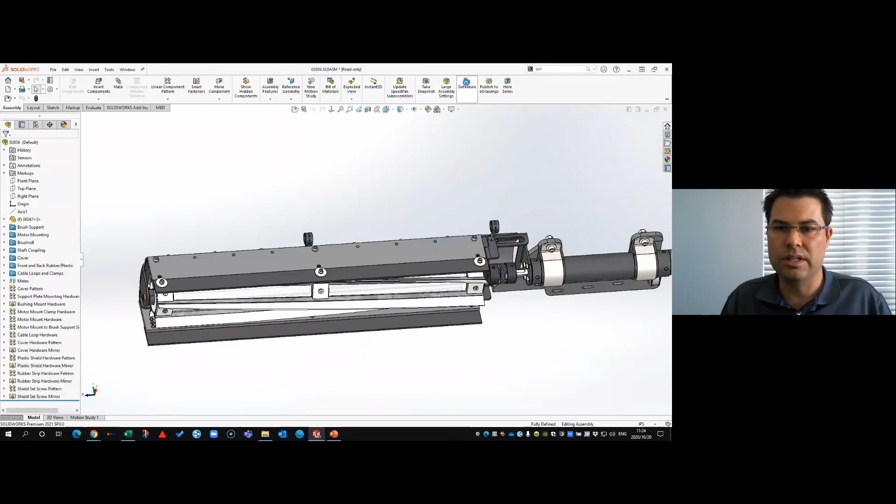De-feature basically removes detail from my complex subassembly. Maybe it's proprietary information I don't want to share, but this subassembly is required for use by one of my suppliers or customers, and I don't want to share my information with them. They just need to take this and put it on their model, so we use de-feature to do that. I want to show you some tricks on how to use de-feature, as well as some new tools that are available, and it's really, really easy. Look how I de-feature this complex subassembly here.

All you do is select next, and I'll start group 1. You select in the model itself the components you want to add to individual groups. The reason I'm doing different groups is because I can control them individually.

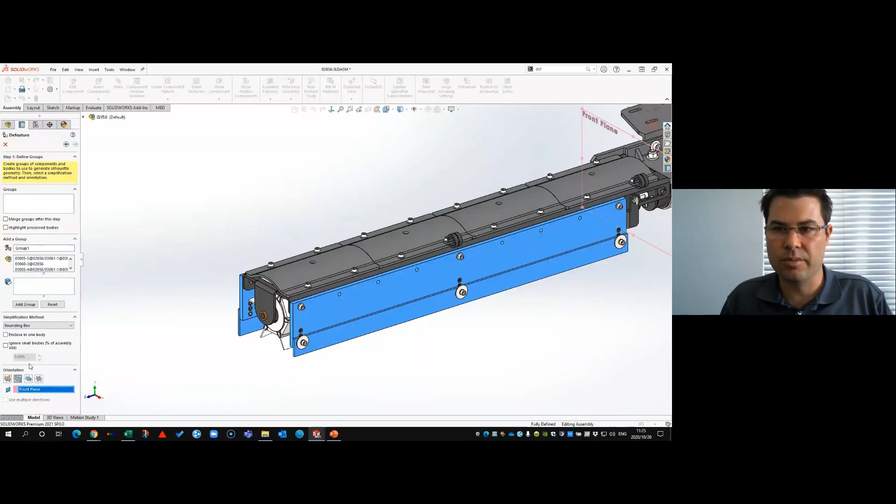I'm going to have the front plane, and I just say add group. Now it's going to split my screen into two, so I can look at my original model and then look at the result. As I'm creating my de-feature, I can look at the result live, which is very handy. Let's keep going.

Let's look at the shaft at the back here. I'm going to select the shaft and choose a cylindrical shape, so say cylinder, and pick a plane so it orientates it really easily, and just say add. That's going to add it to my group.

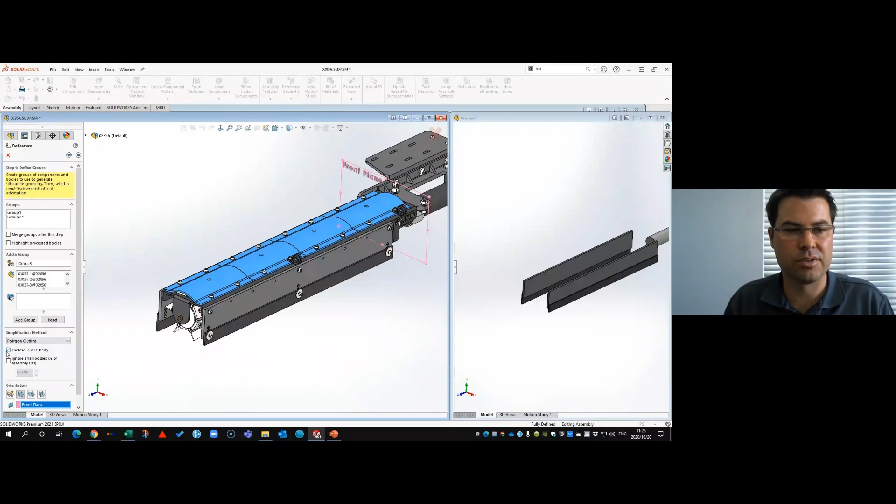I'll now take these top plates over here - this one, this one, this one, and that one - and choose a polygon outline for that, also enclosing them into one body. I just needed to represent it as one body, as a polygon, representing the top part of that - it doesn't need to be super detailed, I just need it like that.

What I can also do is look at my feature tree inside my model and look at this bush roll again. I can select an entire subassembly set and do a polygon outline of that, also enclosing it into one body, orientated with a front plane again so it knows which way to run, and just add it to the group.

It's fine, give it a few seconds and it throws it onto the screen. There we go, looking good. Let's move to the back end of this model.

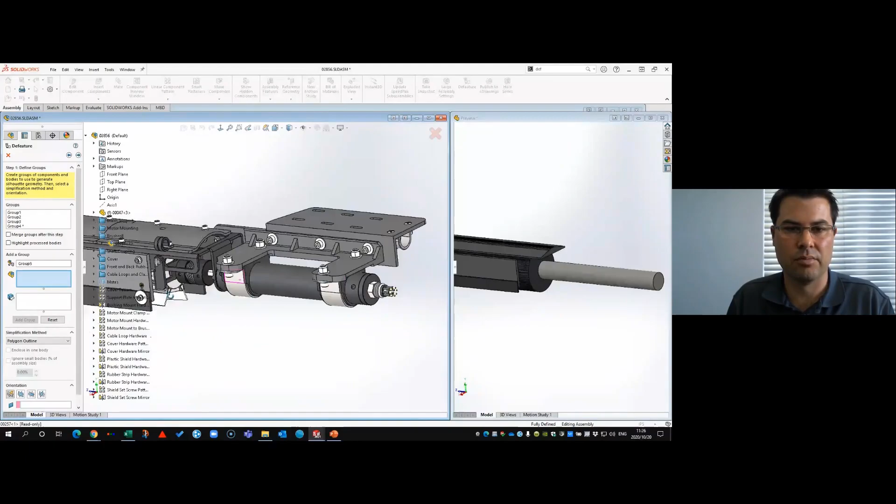I'm going to do something a bit more detailed here, because these bearing housings are important for me to have done correctly. So I can say none for that, or do a tight fit outline - it doesn't really matter, you can choose, I just want to show you the example. Maybe I'll do an exact model in the next one. So place it on the front plane, and I just say add group again, and you'll notice it applies that to my model on the side.

Lastly, I've got these very complex plates over here, and this one here I'm going to copy completely. I'll say none, copy the geometry as it is on the front plane, add it to the group, and there we go.

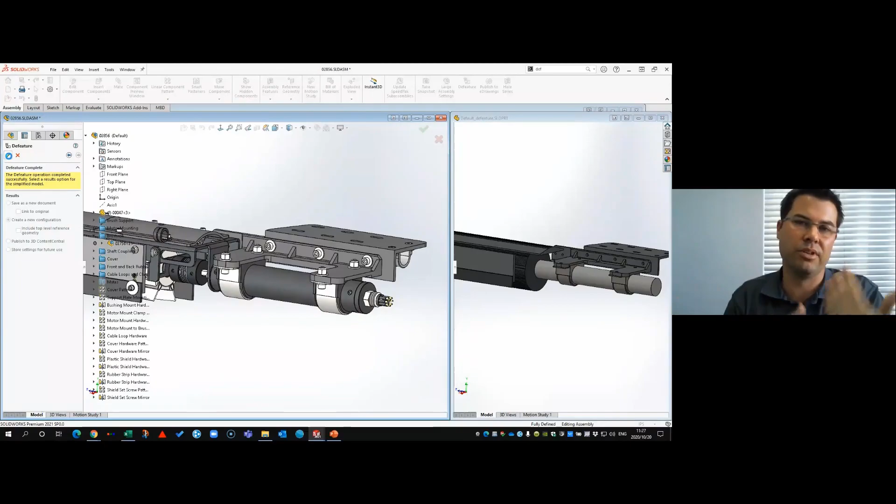Okay, now I'm done, I say next. What's new in 2021 is the ability to create a configuration of that. I love that because you don't have to have two separate files that you've got to replace - it was always a mess working with these different file sets, because sometimes I just need to simplify the geometry. There's no changes in the model at all, it's just a simplified version of what I have. So while I'm talking about performance, there's the simplified version.

If I go to the configuration in the tree, you'll see I've got a default version. The previous versions of the other configurations are still there, but you'll see an additional configuration underneath my default. If I double click on default, it's back to default, and if I go to the de-feature, it's there. Did you notice how snappy it was changing configurations? That's also been improved in SOLIDWORKS 2021 - switching between configurations and between models has all been updated.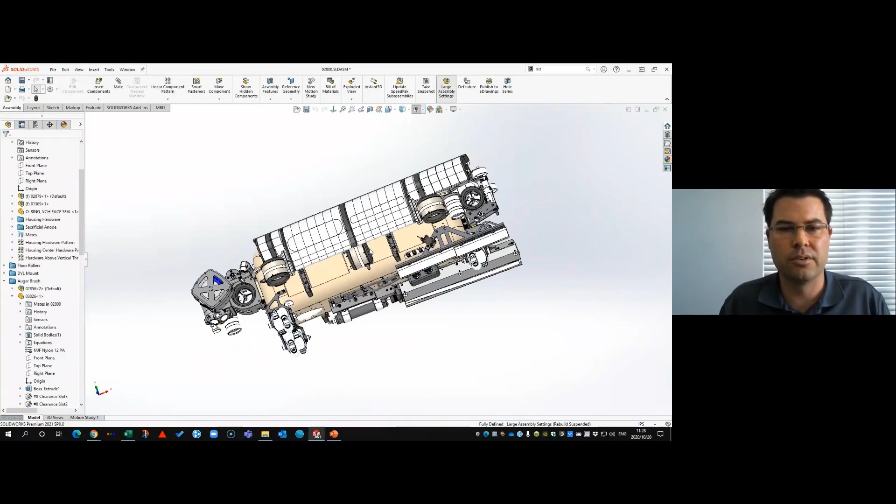Now if I Control-Tab back to my main level assembly, I want to show you how we can use this defeatured subassembly in my top level assembly. Because it's all integrated into one configuration environment, the intelligence is built into the subassembly itself, and I don't need to worry about creating external files, which was always a problem with defeature before. This is one of those tools that's been greatly enhanced for usage. You see my part is fully loaded there - now I can right-click on it, and this will actually allow me to...

Sorry, my eyes are not great. Use defeatured - there we go. So there's use defeatured, you can see it there.

So what it's going to do is switch the configurations for me. I don't need to go in and right click and go to configurations and default, I don't have to do anything like that. Immediately it's going to load that basic version of my subassembly. Notice that all of the mates are still there, there's no issues at all, it's very happy for what I've done. And you can see the icon in the tree has changed there. Very, very nice.

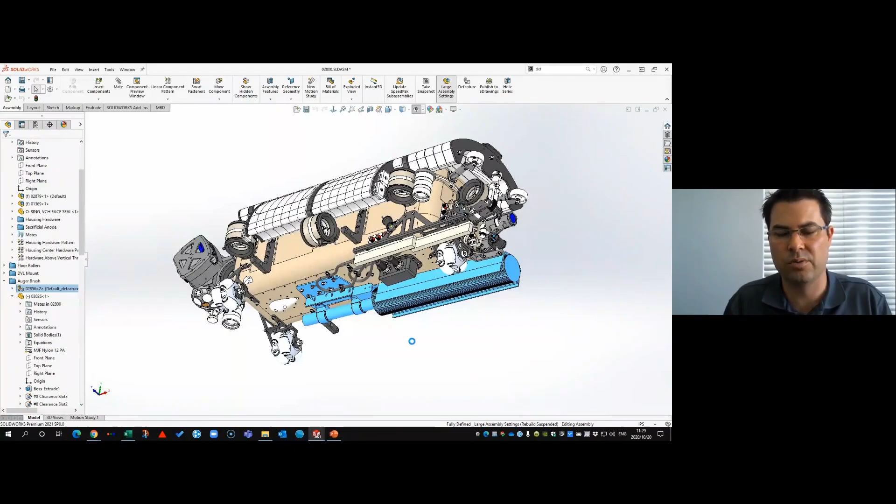And I can update that, or I can set it back to parent, and within a few seconds that thing's switched out. So switching between configurations and working with complex top level stuff has never been easier.

Very nice, very, very happy with what they've done in SOLIDWORKS.

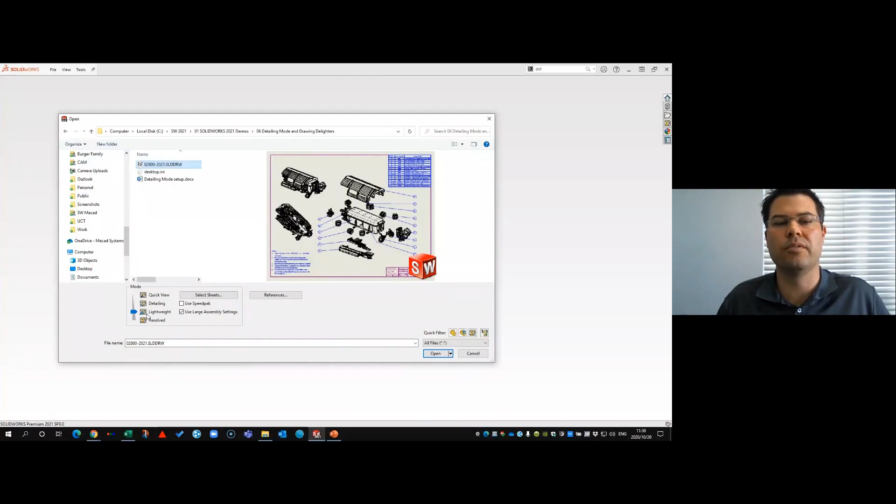So I'm going to go and look at detailing mode and look at this assembly. Now look at this environment at the bottom here - I've got the normal quick view, lightweight, resolved. Detailing mode opens up only a graphic - or not a graphic, the quick view is a graphic. Detailing mode is just the drawing without loading the models, but it will still connect to your model, it just doesn't load your model. So let me look at this.

The same multi-thousand component assembly - nothing's in my RAM, everything's closed down, everything's off, it's not loading anything. If I say open, it takes, I don't know, 5 or 6 seconds to open up this 2,500 component drawing with multiple sheets. Now again, I'm on 4 seconds, 5 seconds, that thing's opened.

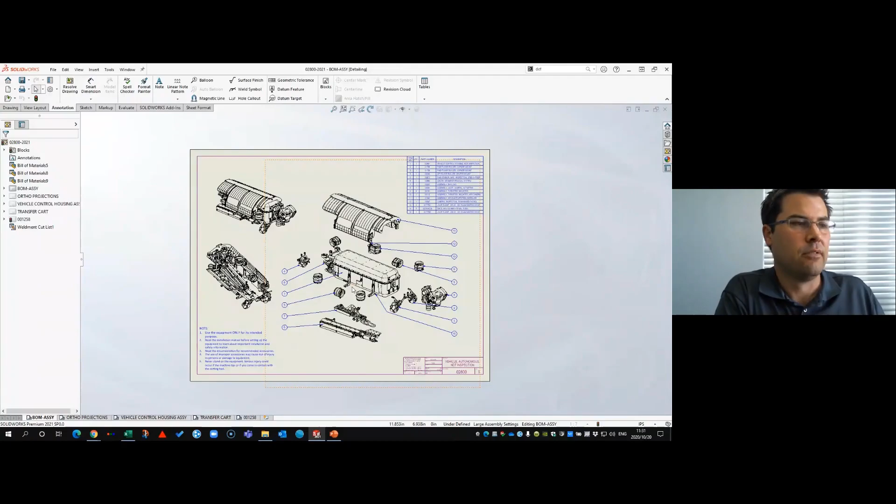Now what you will notice as well with the performance pipeline, or this performance booster in SOLIDWORKS with the GPUs I told you about, in 2021 SOLIDWORKS, all of that performance from the assemblies comes to your drawings as well. So check this out - when you are working in drawings in SOLIDWORKS now, you will notice that the speed of panning, zooming, rotating, working has also all been shifted over to the GPU. So your supported graphics cards are going to crunch away these drawings at a crazy speed.

Performance improving, performance on opening drawings, detailing view, creating sections - all of those things that we do often are again enhanced with speed. But have a look at this top part of the screen over here, where I've got all of my tools. Look at how much is available now in detailing mode. And again, this is a 2,000 component drawing, I opened up in 5 seconds. Look how fast I'm able to switch between the different tabs of the drawings - it's crazy fast.

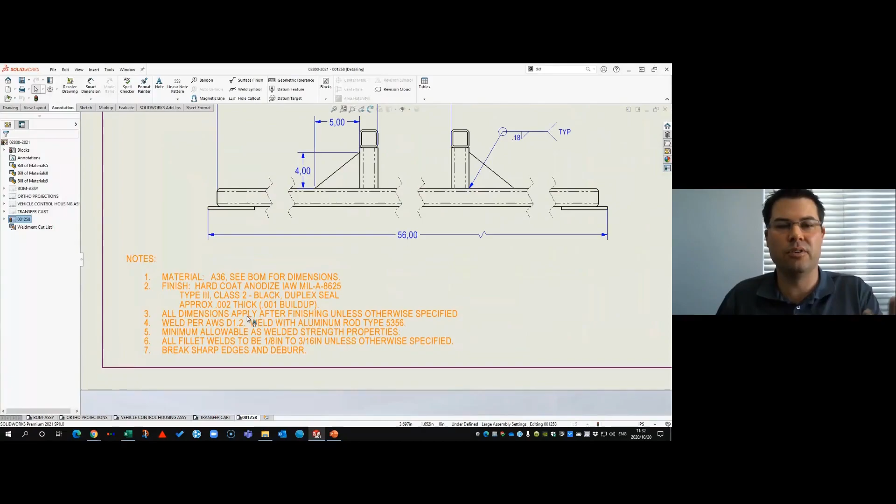And then I've got the functionality that - it's not just a view, I can actually work in this thing. I can detail, that's why it's detailing mode, it's a clever name. I can go in and delete the stuff, work like I normally would, add dimensions, add tolerances. Let's look at this bottom corner here.

You can see this dimension is maybe not complete, this guy needs to move over a little bit, the leader is not complete. So we've got all of this functionality that we do in normal SOLIDWORKS detailing mode, and you can see I can just change the dimension that's already created. I'm going to fix that. I've also got tools like with the pop-up, I can add tolerances as well. So maybe I'm going to add a symmetric tolerance to this thing.

It's fully functional now. You can create as you want. This is super, the ability to dimension and add and work as you need be.

Also, I've got a balloon, and I'm going to create. Let me just put my balloon there. I want to just make a note of this balloon, not for anything specific. Just going to put some text in there, I'm just going to call that 334. That's fine.

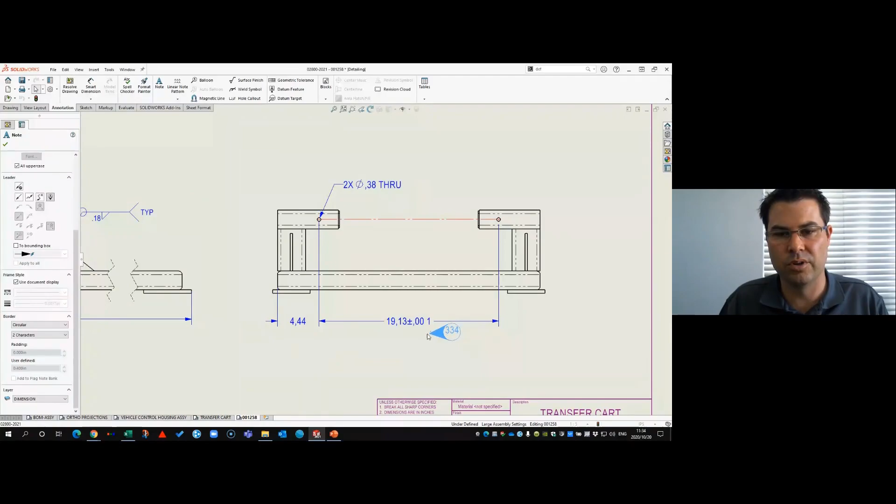And all of my properties are available to use. Something small for those in the automotive industry: there's a VDA leader that's now available for those who work in the automotive space, which has been requested with us, so I wanted to show you that. The VDA balloons are now supported as well.

This bottom section's been detailed quite nicely, but the top part of the drawing hasn't been done. So if I look at the drawing environment over here, I can add things like detailed views, crop views, broken views. Let's break this top view here as well, since that's something I want to detail. The model's not loaded. I'm going to create this in my broken view, and dimension this now.

This is the functionality that was lacking last year, and it allows you to actually work in detail in an environment that's conducive to not needing the model to be loaded.

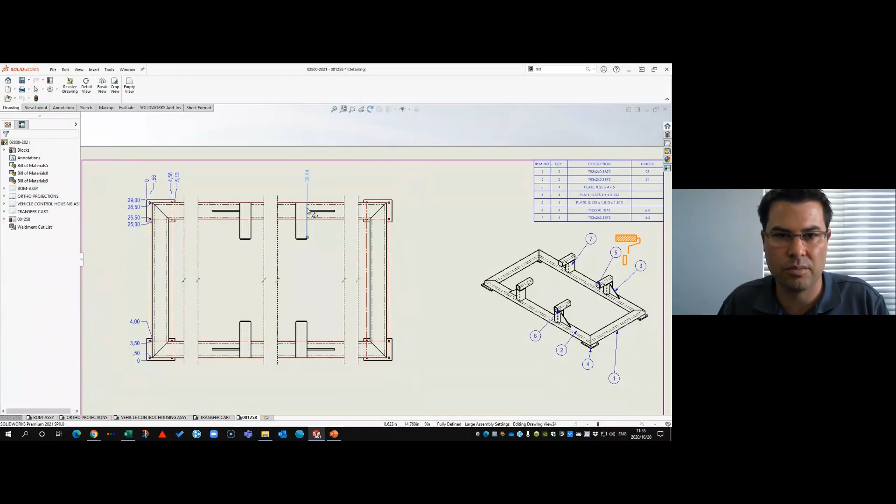I just need to add ordinate dimensions, for example. So I can add to the ordinate and continue dimensioning as needed, maybe to the center line there, this end part. SOLIDWORKS automatically adjusts that for me.

What about some detailing mode? I want to maybe detail this foot at the bottom over here. Detailing mode allows me to do a detailed view, so I'm going to do a detailed view of that foot at the bottom over there. And there it is - maybe I want to add a dimension to that.

Now I've even got these foreshortened dimensions that are there, which is really nice as well. And last but not least with this, I've actually got hole callouts.

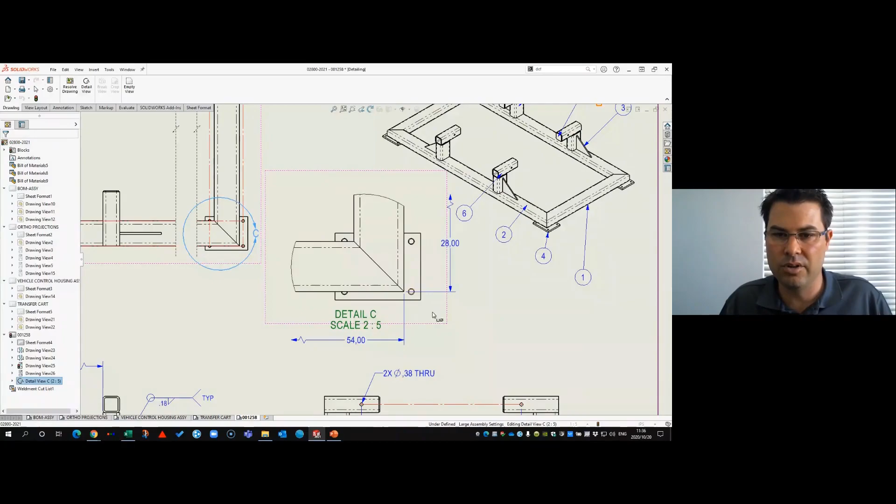You've got these context toolbars that are available. If you just click in a view, you've got these context toolbars that you can customize yourself, or you can push the S key - you can customize that here too. I'm going to do a hole callout, so even hole callouts are supported in this detail environment.

Really, really nice tool. What's great about this is I can save this, I can even go and save as - I can save this as a PDF, or as a DWG or DXF. It's possible to do that as well.

It doesn't need the model loaded, and it does warn me if the model changes - you're saying, oh, but what happens if someone changes the model? Well, SOLIDWORKS in the back end keeps those links, those references are there. If I save this, close it, work with it, and the model updates, it's going to warn me. It's going to block out the views and say, hey, you need to reload the model. It's changed. And SOLIDWORKS will allow you to load the model in.

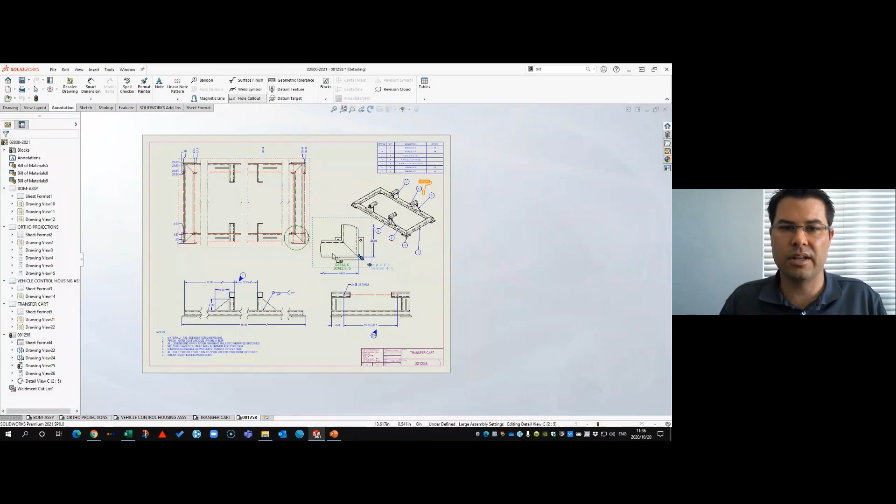Now, something that's always been a bit of a frustration for me is when you're working inside of the drawing environment and you've got sketches - they were always dumb in drawings for some reason, but never had the same kind of intelligence that normal SOLIDWORKS had, and it was always strange to me. Now in SOLIDWORKS 2021, your sketches or your blocks have the same pop-up and same functionality that you would have while working in SOLIDWORKS sketching.

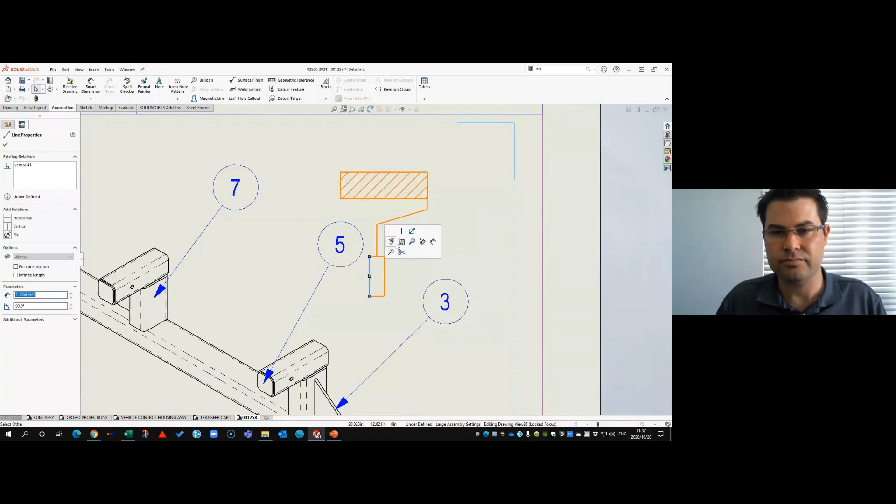So if I just select that midpoint there and that endpoint there, I've got the pop-up to make it coincident. That's just so much easier when working inside of the drawing environment. So that's something small but handy.

I think I've covered everything. I think this detailing mode is amazing. I think it's going to be well used, and it's one of my favorite enhancements in SOLIDWORKS 2021. I think I've covered everything for today.